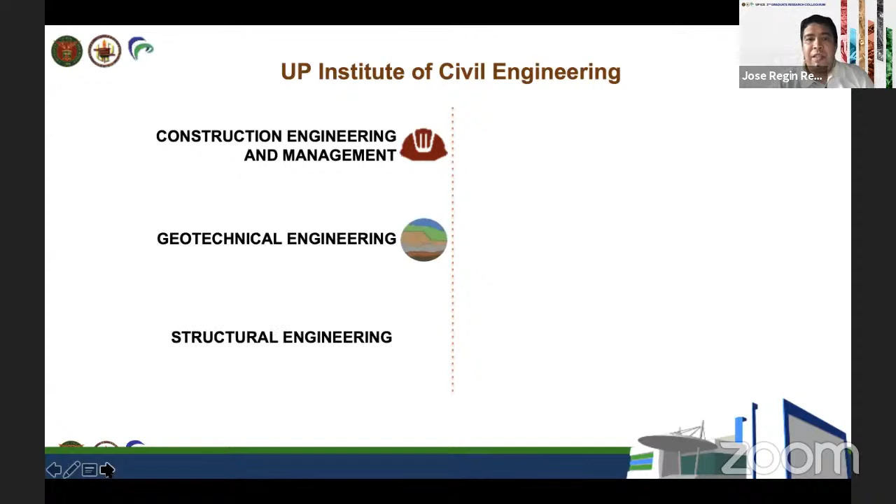Aside from these, allow us to also mention that the Institute has a research agenda, according to the 6 groups. In UP Institute of Civil Engineering, we have 6 groups: the Construction Engineering and Management Group, the Water Resources and Coastal Engineering Group, the Geotechnical Engineering Group, the Structural Engineering Group, the Environmental and Energy Engineering Group, and the Transportation Engineering Group.

And each of these groups would have their own research agenda, so I won't go into that anymore this afternoon.

But I wanted to share some of the recent and ongoing research projects of the institute, the details of which may be found also on our Facebook page, our social media account. As you can see from the following slides, there are also the contact information of the project leads, so you're very welcome to connect with them if you're interested in their topics.

And perhaps if you want to also pick their minds regarding the prospective topics na siguro gusto niyong i-develop, you may also contact them. So just a run through of some of the projects being undertaken at the university.

We have here the e-TRAMS project, enhancement of transportation management software. The project lead is Dr. Sean Palmiano, who is also head of our transportation engineering group. This is part of their Intelligent Transport Systems Laboratory, which is hosted by the National Center for Transportation Studies.

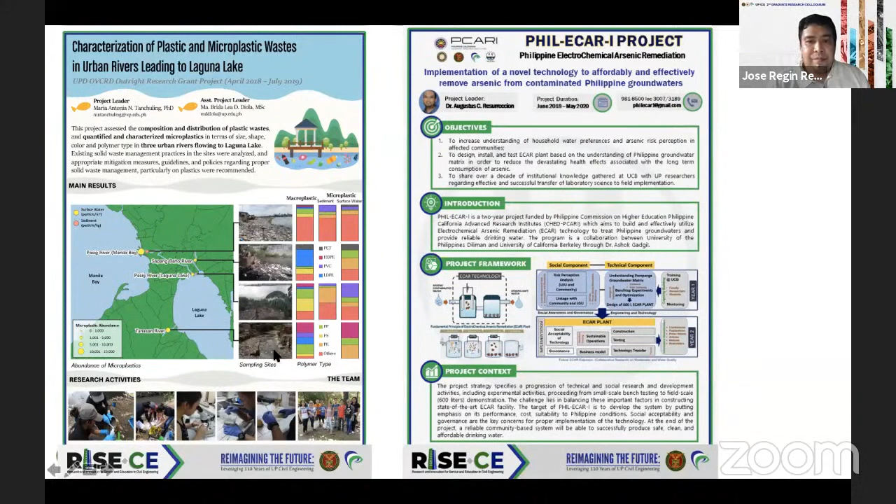And then we have the IWASTO project, integrated waste analysis, survey and technological options. I hope I pronounced that right. This is also funded by the DOST. The project lead is our director, Dr. Tonette Tanchuling. Then you have Project SMART, the ecosystem modeling and material transport analysis for the rehabilitation of Manila Bay, led by our research coordinator, Dr. Eugene Herrera.

We also have a project on the determination of appropriate expansion of perlite to conform to standards of lightweight aggregates for use in construction. This is led by Assistant Professor Belle Caram.

So these are among, I think, the newer ongoing projects: the prototype automated visual survey equipment, or PAVE project, which is led by Dr. Leia Brunuela Ambrosio. This is about pavement engineering.

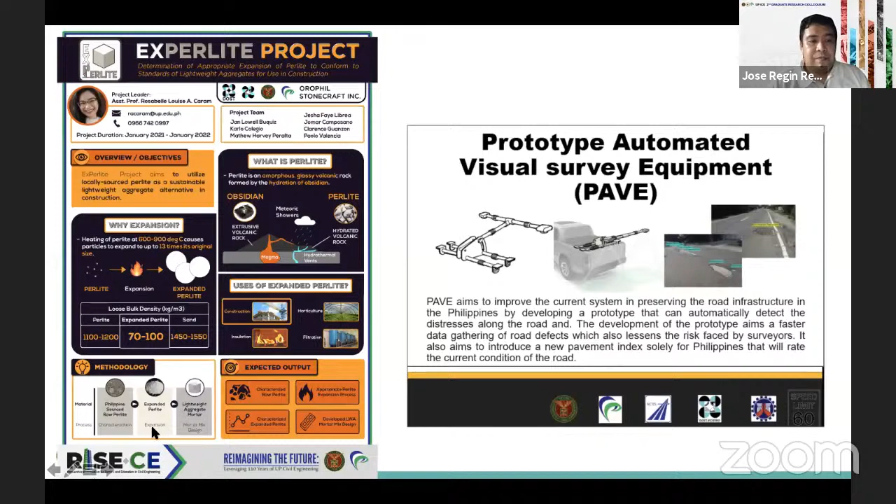So these are just some of the projects ongoing — just to mention a few that are also funded by various institutions, especially the DOST, mainly through PCIEERD. The institute has also been blessed with a number of projects supported by international institutions as well as private funding.

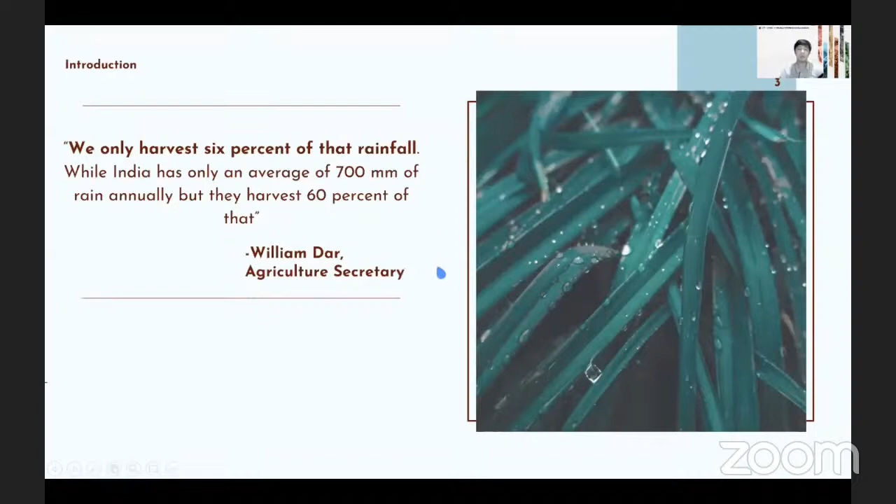For the methodology of this study, we use multi-criteria decision analysis, a decision tool that integrates different criteria and evaluates different alternatives to decide which option is most preferred. This is useful when compiling assessments of different stakeholder preferences.

Our study area is Teresa Rizal. It is located about 32 kilometers east of Metro Manila and has a population of close to 60,000. It's composed of about 9 barangays, and of those, 3 barangays experience weekly to daily water interruption.

It would be good to use this as a scenario for comparing preferences of those with less water interruption versus those with more frequent interruption. For the framework of the multi-criteria decision analysis, we've used 4 factors: reliability, total cost, adoptability, and benefits. These 4 factors have different weights that may change depending on the scenario considered, but a general scenario will also be provided.

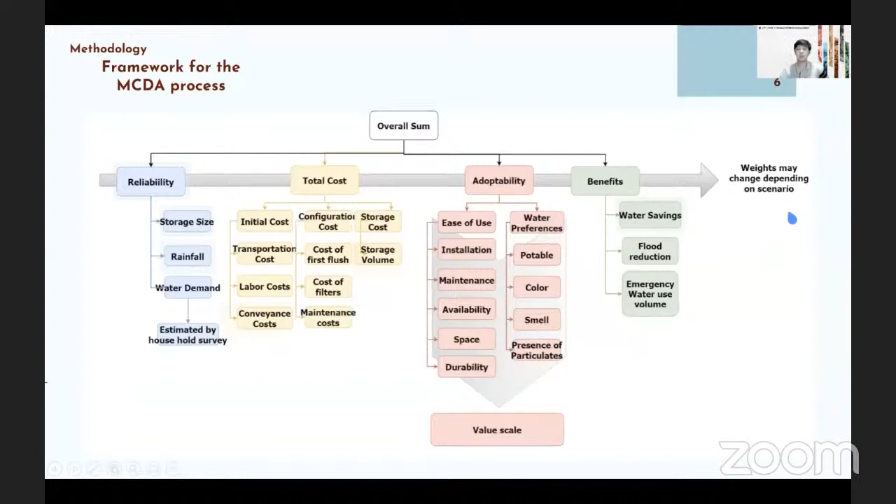For the survey conducted, a preliminary survey was first done. This was a closed group of at least 20 people, and we tried to create the first relevant criteria. At this stage, we wanted to remove any research bias we might have introduced, so we wanted to confirm those through the preliminary survey.

Then the main survey, along with an IEC, or information, education and communication, was done. This was to inform respondents of other preferences and alternatives for rainwater harvesting, and the basic knowledge of rainwater harvesting. We surveyed 329 people online and had them rate the importance of factors on a 4-point scale.

The output for this was a water demand estimate. We also used that survey to estimate water demand and their preferences and weights. For problem parameters, we obtained the averages for roof area, household size, and water demand from the survey. We also had runoff coefficient from references, and rainfall data from local rainfall stations that measure average and daily rainfall.

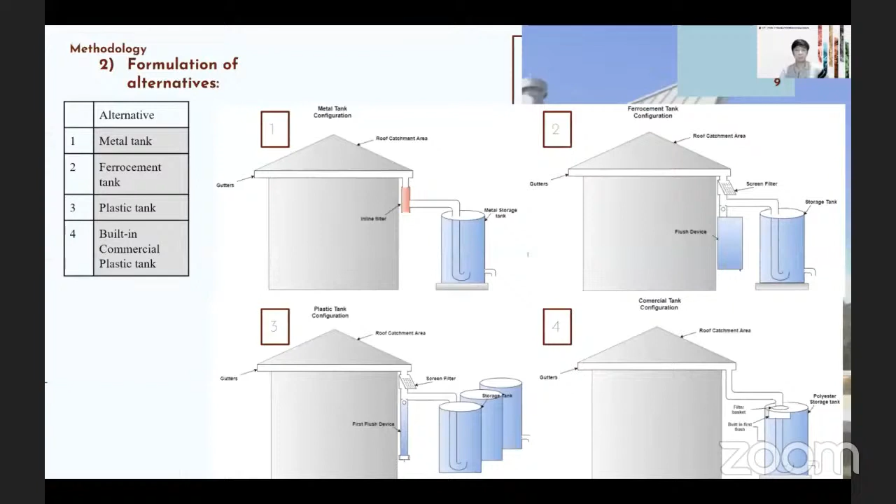So the main survey concerns, and these were the results: about 2/3 experience either not enough water supply or frequent water interruptions. The main problems with rainwater harvesting, or RWH, are the source, as it's a possible source of mosquitoes, and that people consider roof water to be dirty. I believe these two factors are strong factors that are probably hindering people from adopting such systems.

They also want to use the harvested water mainly for toilet flushing, watering plants, and cleaning. Note that all three of these are non-potable uses, and will be reflected in the water demand that the rainwater harvesting systems will supply.

About 81% of them want to harvest rainwater, so there's actually a large percentage that want to do so. And 76% would still collect rainwater even though it might only be available during the rainy season.

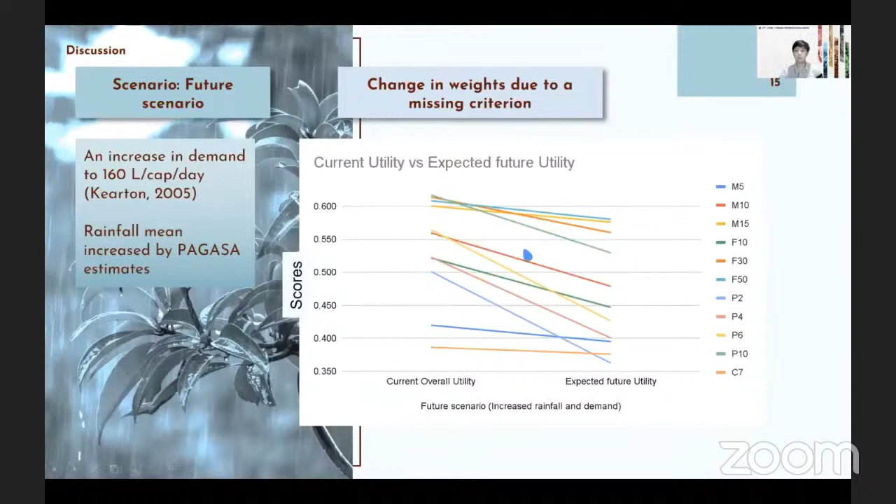In conclusion, about 2/3 of the respondents experience problems from their current water supply. 76% are willing to harvest rainwater even though it's only available during the rainy season, and their main concerns are mainly about the presence of mosquitoes and dirty rainwater.

P10 is the most preferred alternative since it has a balance of cost and reliability, with F30 and F50 coming next. When we consider high-income residents, their preferences shifted towards the F50 alternative, and so did the future scenario, shifting towards F50, as this is able to provide the reliability and durability for these scenarios.

So that's it. Thank you everyone for listening.

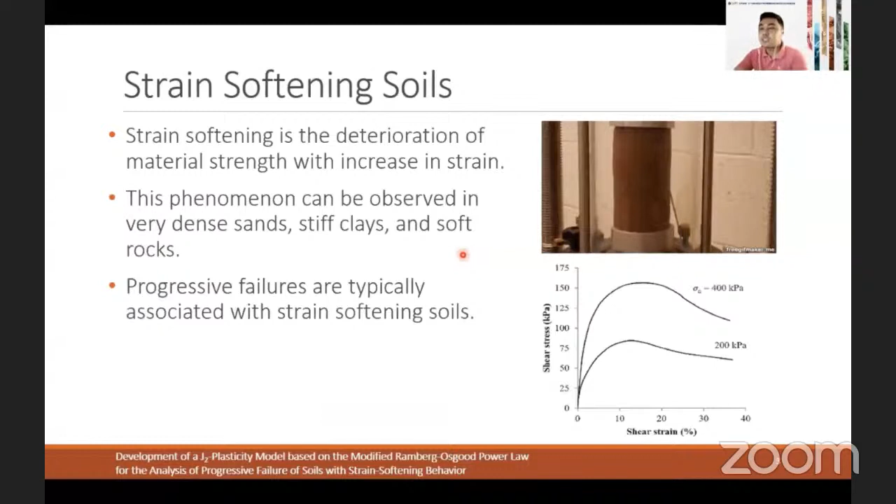In geotechnical materials, this phenomenon can be observed in very dense sands, stiff clays, and soft rocks. Progressive failures, as we described earlier, are typically associated with strain softening soils. So how do we analyze these progressive failures?

In this study, we aim to develop a plasticity model which utilizes the stress-strain behavior of a soil sample in the finite element analysis of progressive failures. We do that by getting the strength test results from the laboratory and then use the modified Ramberg-Osgood power law to create a mathematical expression for these strength test results. And then we incorporate this mathematical expression into the J2 plasticity model, which allows us to determine the stress during the plastic deformation. We then incorporate this in the finite element analysis, in which we include the problem geometry and loading, which gives us the geotechnical analysis of these progressive failures.

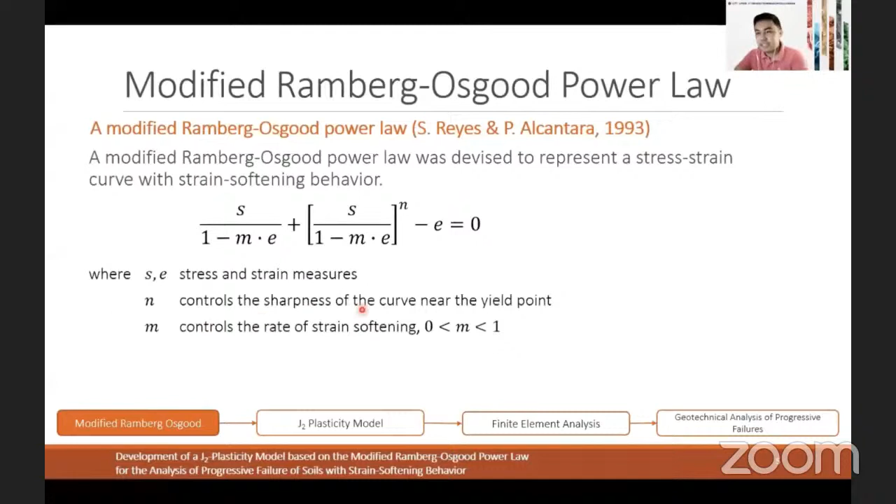So let's start with the modified Ramberg-Osgood power law. This was developed by Reyes and Alcantara in 1993, devised to represent a stress-strain curve of soils with strain softening behavior, represented by this mathematical equation. In here we have four parameters: S and E are stress and strain measures, and then N and M. This equation represents the backbone curve of the normalized stresses and strains, in which if we nominate values for N, M, and E, and solve for S, we can get a curve that looks like this.

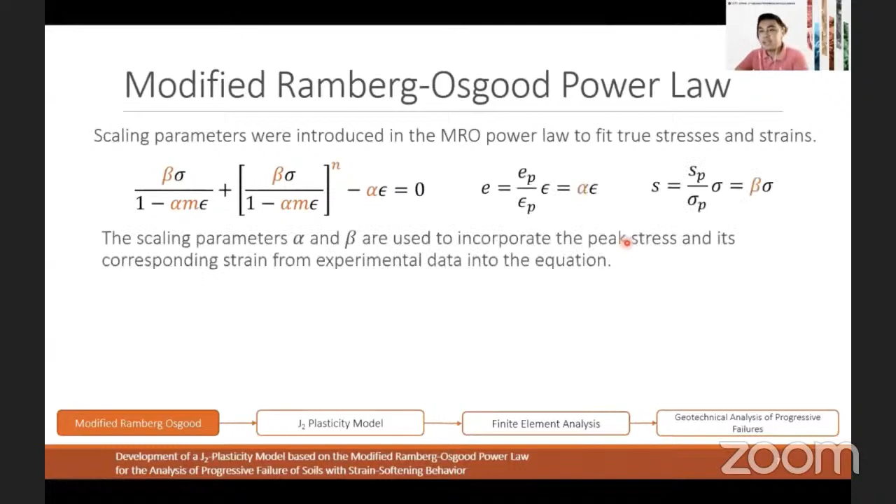So to use the modified Ramberg-Osgood power law for this study, we devised two parameters, alpha and beta, in which we relate the normalized stress measures to the experimental measures of stresses and strains as determined in experimental tests. So the MRO will need four parameters for the curve to be properly defined: M, N, alpha, and beta. And then the next problem is how we get this M, N, alpha, and beta.

So we use the method of least squares to determine these parameters given a set of experimental strength results. In a typical method of least squares, we minimize an objective function, which is the sum of the square of the difference between the observed stresses and the fitted stresses. As you can see here, the fitted stresses will be solved by the modified Ramberg-Osgood power law, and it is solved implicitly, so we solve it iteratively, typically by Newton's method.

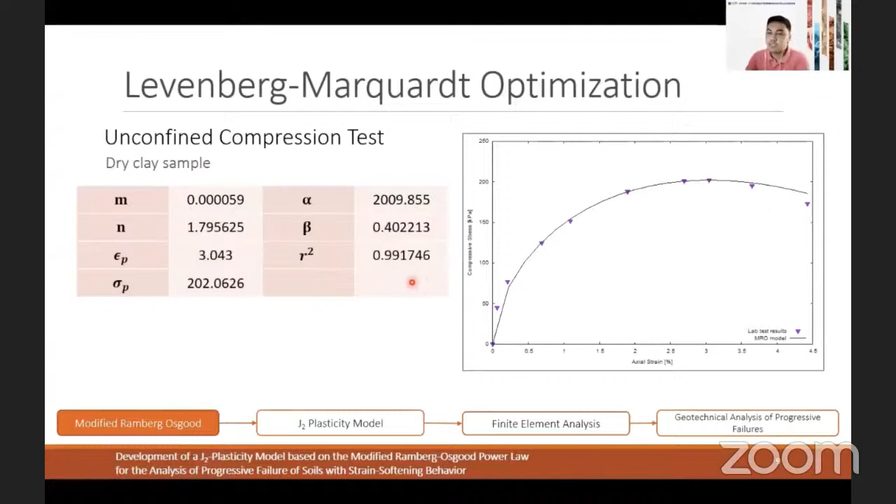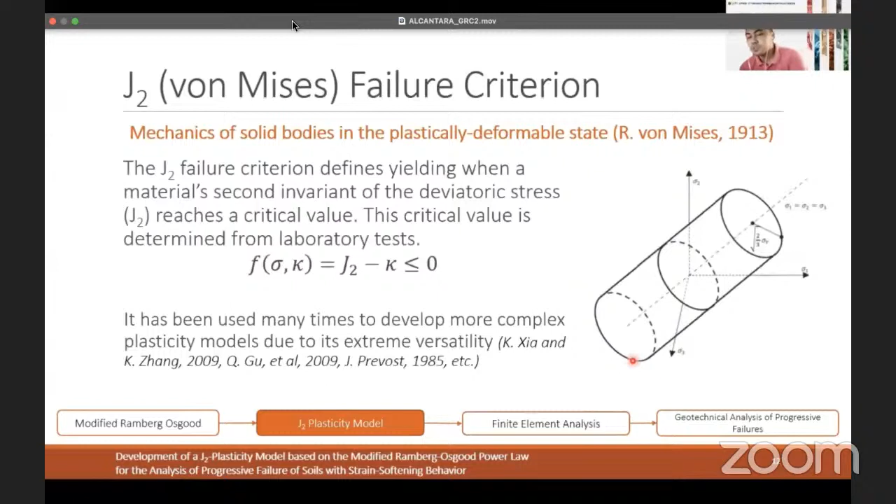And then we move to the plasticity model. For this study, we use the J2 failure criterion, or the commonly known von Mises failure criterion, in which it defines yielding when a material's second invariant of the deviatoric stress reaches a critical value. Mathematically, it looks like this. Geometrically, if a stress state is outside the cylinder, it means that the material has already yielded. We chose this failure criterion because of its extreme versatility, since it was used by many authors in developing more complex plasticity models.

So we implement a stress integration algorithm in which we have this failure surface, and then we have an initial stress state.

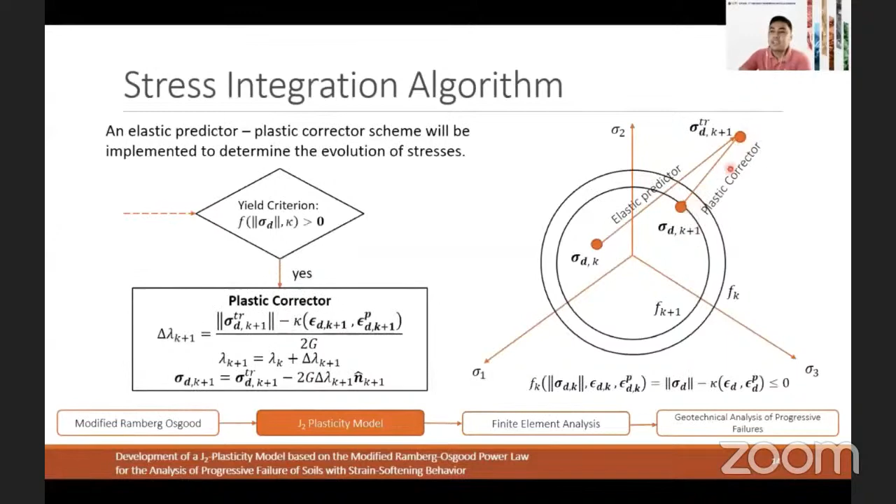And then if we apply displacement, there is a change in stress. If it is inside the yield surface, it means that it does not yield yet, so this is the final stress state. However, if the elastic predictor gives us a yielding stress point, since the material is strain softening, the strength should deteriorate. Therefore, it will move back into a lower stress state, and this will be the final yield surface.

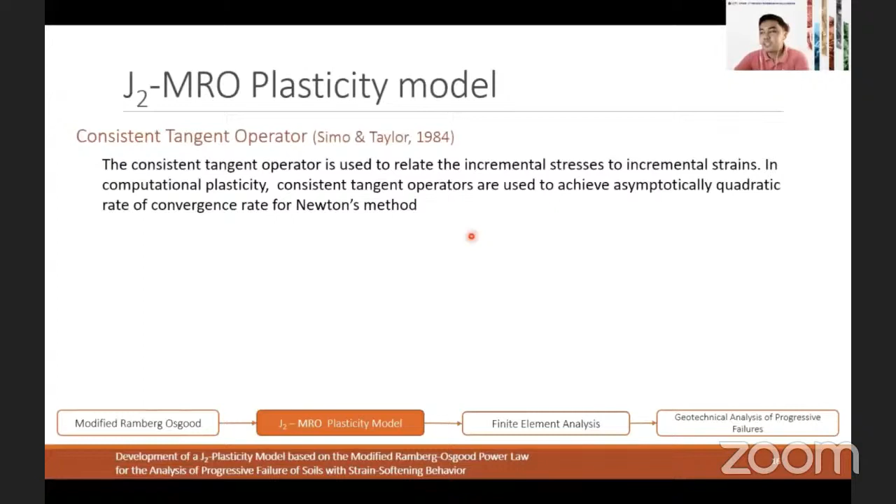Initially, we implemented the model using one element, a 9-node quadrilateral, in a C program. We have two types of loadings, stress loading and strain loading, but for this presentation we will only include the strain loading. We imposed prescribed displacements at the boundaries of the quadrilateral, and since it is strain loading, we can observe the post-peak response of the element, so hence we can see the strain softening, which we can't do in stress loading.

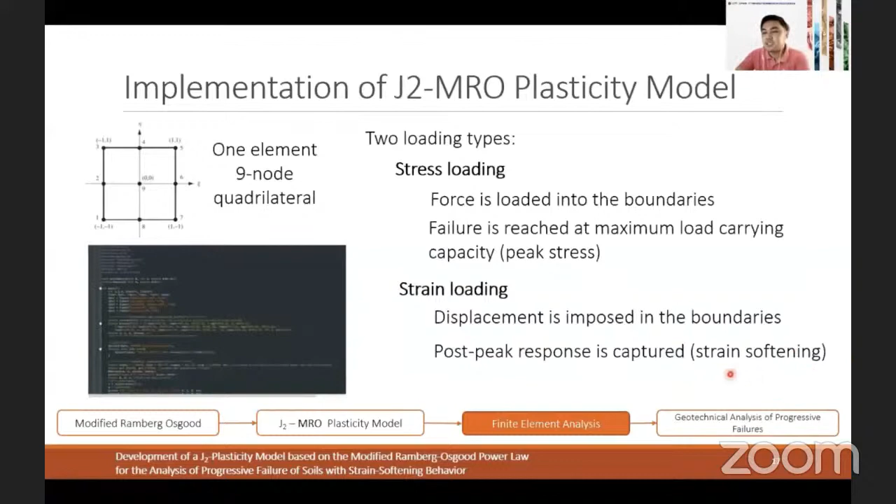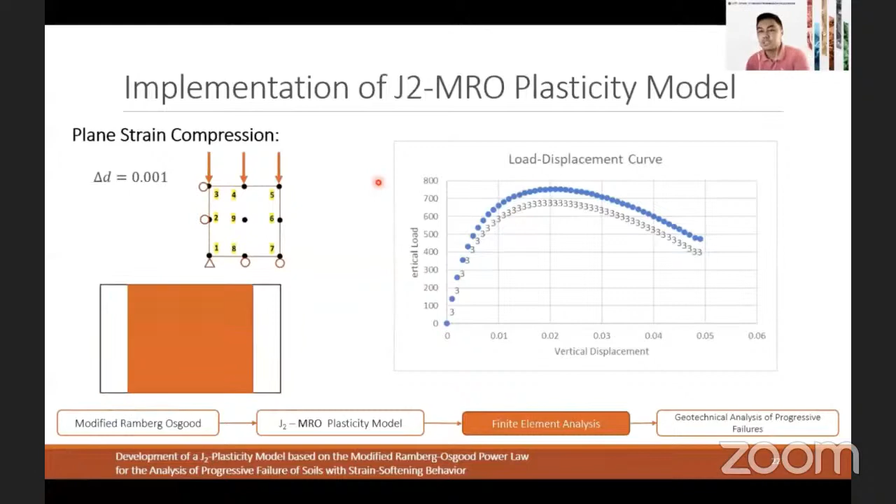We also did that for plane strain compression instead of axisymmetric. For this case, the stress results from the J2 MRO implementation also agrees with the experimental data, and this is the load displacement curve. The strain softening is also captured, and the rate of convergence is also fast enough. It is quadratic rate of convergence, and it only needed 3 iterations for each increment of displacement. These are the stresses and strains experienced by the Gauss points.

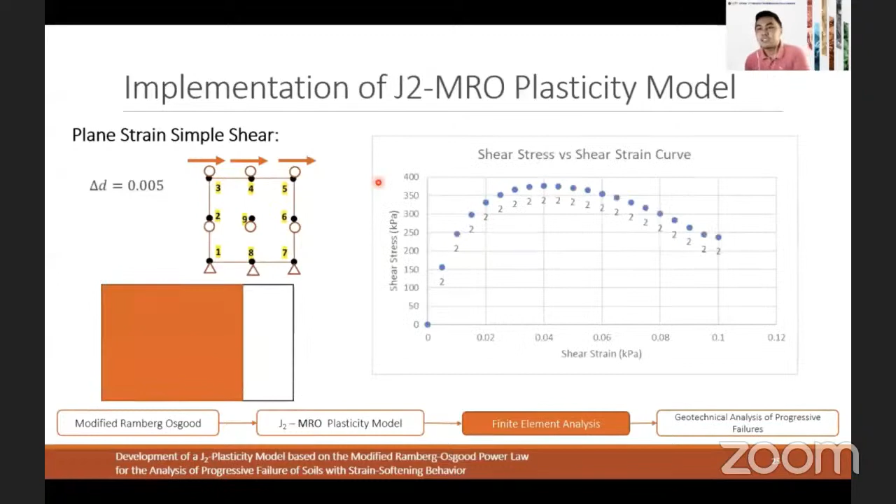Finally, we did the same thing for plane strain simple shear. Again, there's an agreement in the stress strains for the experimental and the J2 MRO results. This is the shear stress versus shear strain curve, and these are the stresses experienced by the element. The shear stress for all the Gauss points are equal, and these are the residual values for the stresses.

After this, we are doing the geotechnical application. We are looking at the deformation of soil under surface strip and circular footings. For strain loading, the expected output is a contour map of the stress distribution as we load the footing, along with the plastic straining and the deformations.

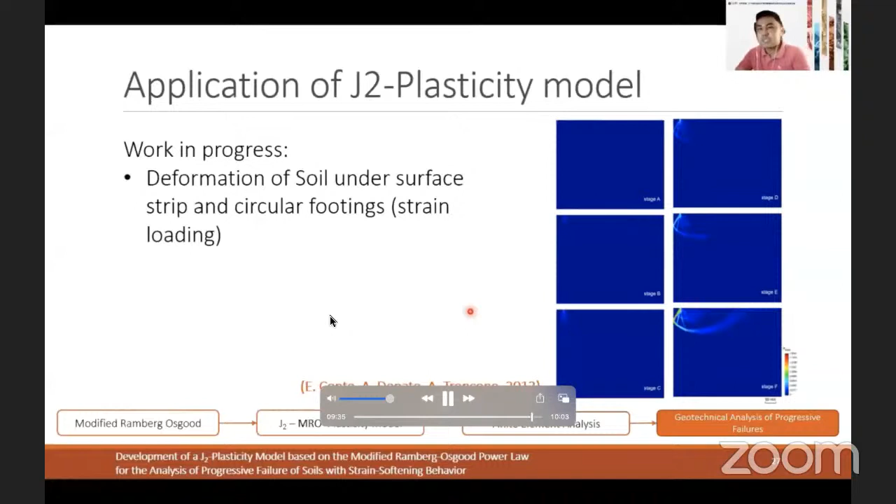Initial conclusions: the use of the Levenberg algorithm in determining the parameters of the MRO power law was proven adequate and repeatable. The developed J2 MRO plasticity model was able to satisfy consistency for both axisymmetric and plane strain conditions. With the use of the consistent tangent operator, a quadratic rate of convergence was observed, and the number of iterations to convergence was minimized. That's all, thank you very much.

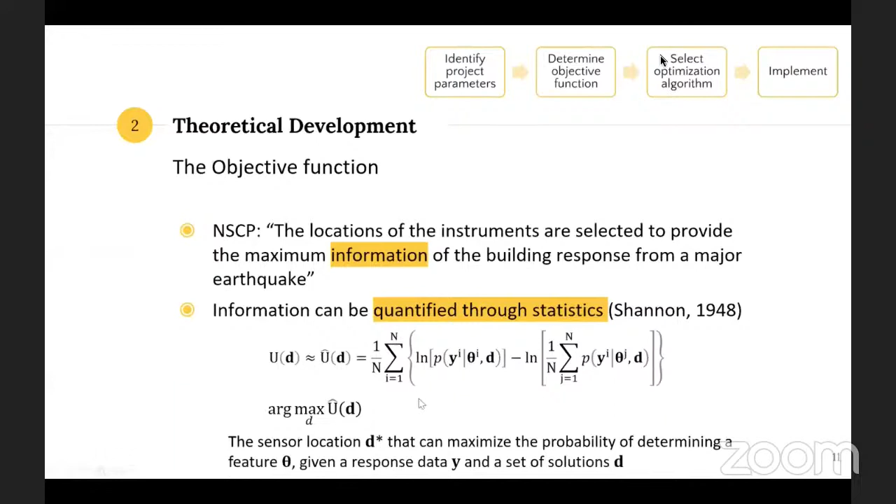So what is the objective function that we're going to use? Without going too much into detail, this is the objective function—maximizing this function here. What does this say? It basically says that we need a sensor location D star from this optimization problem that can maximize the probability of determining a certain feature theta, given response data Y and a set of solutions D. Essentially, the output of this maximization problem is the optimal D that will maximize the amount of information in a given response data, considering a certain feature theta. That's the objective function.

Now, how do you select the optimization algorithm? The scope of the algorithms for this study was the covariance matrix adaptation evolution strategy, so all the algorithms in the selection are CMAES. What is CMAES? It's a derivative-free randomized global optimization algorithm that relies on the continuous multivariate normal distribution. It's useful for problems with large population sizes that can be prone to local convergence, as in the case of optimal sensor placement.

Apart from the continuous version of CMAES, we're also going to include in the algorithm space a discrete version of CMAES, using the multivariate binomial distribution. So essentially, we're choosing between a discrete implementation of a continuous CMAES variant and the discrete reformulation of CMAES. That's the selection we're going to use.

So in implementing this, first we implemented it on a steel column, 100 by 100 by 600, fixed supported on the base, with two cases.

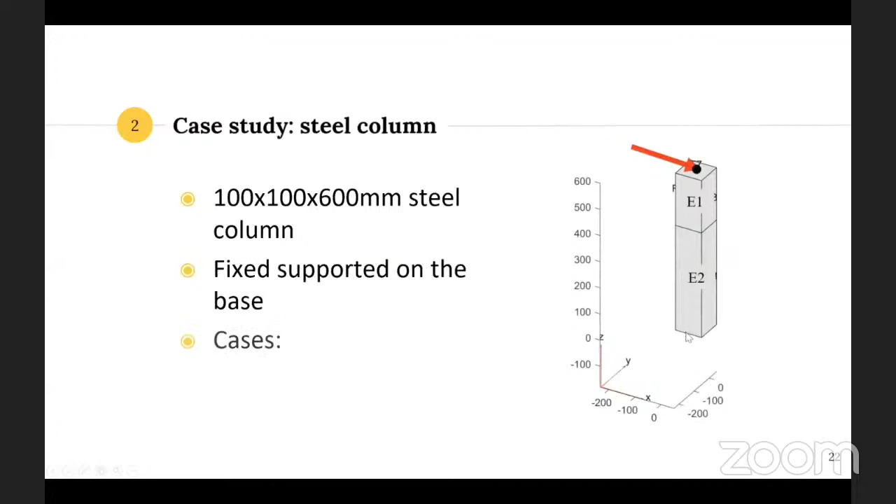Implementing this framework, the project parameters are: number one, we're going to use one sensor and consider two cases. The objective function is the same as you saw earlier, and for the selection algorithm, we're going to compare rank mu CMAES and discrete CMAES.

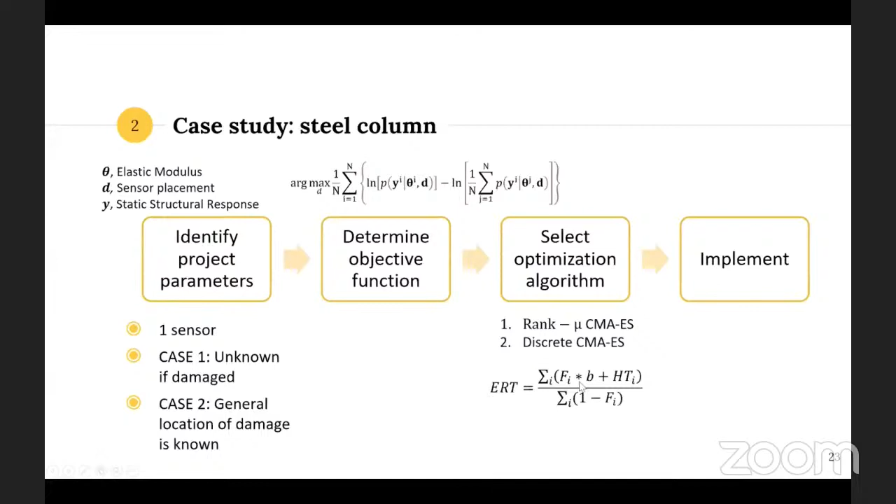How do we compare the two? We employ a parameter called the ERT, which depends on the budget of your calculation and a certain hitting time.

Applying that to this problem, considering case one, assigning probability distributions of the elastic modulus for region 1 and region 2, we identified that the optimal sensor placement is at the top of the steel column. Placing the single sensor there will grant you the maximum information.

How about case two? We know that the general location is at E2, and hence E1 is undamaged, so we can already set the elastic modulus at E1 to 200 GPa. At E2, since we know it's damaged but don't know how much, we assign a probability distribution there. After running the algorithm, we determine that the OSP is at 500 — it shifted downward to the location of the desired information.

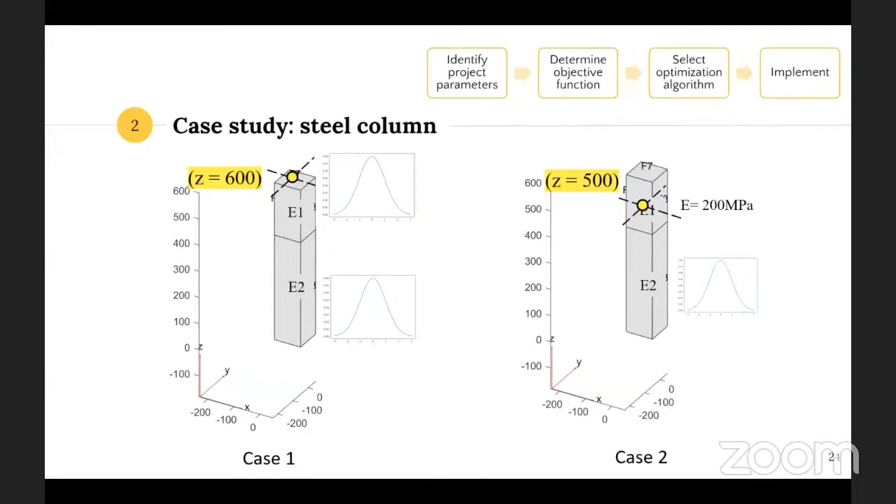Since the ERT is greater for discrete CMAES than for rank mu CMAES, that means rank mu outperforms discrete CMAES — rank mu is better for this problem.

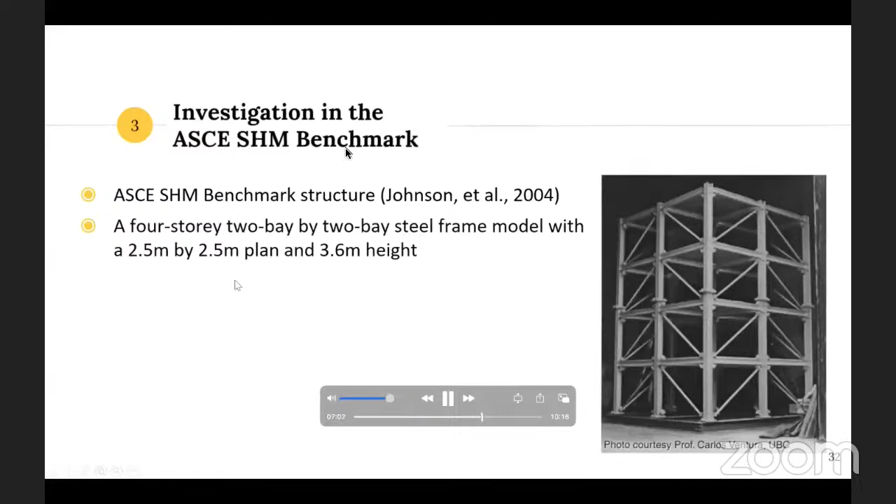Now, how do you implement it on an actual building? For an actual building, we're considering the ASCE SHM benchmark structure, a 2.5 by 2.5 by 3.6, 2 bay by 2 bay steel frame, which has a published sensor placement.

What we did was compare the modal properties obtained from the sensor positioning published in their paper with the actual OSP output by the algorithm, considering two cases once again: undamaged and damaged. The damage is located at the first floor bracing.

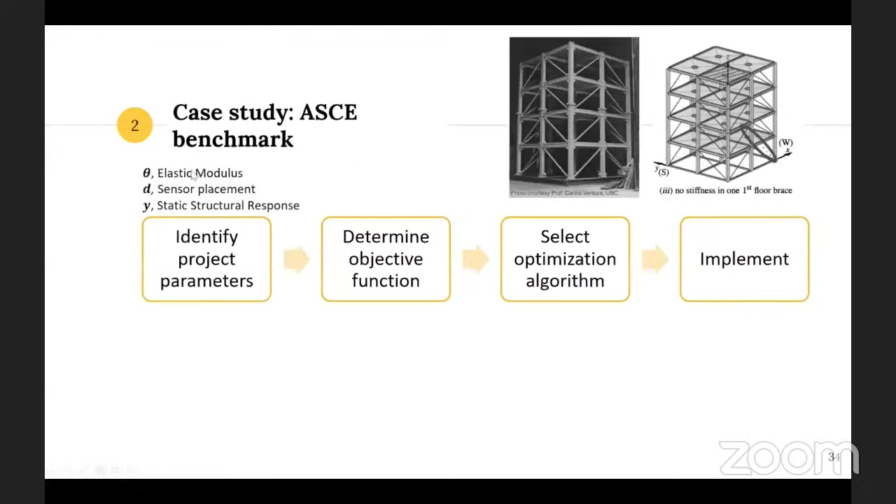Using the same framework, the project parameters are the same set we showed earlier, considering the two cases, and the objective function is still the same objective function.

Before proceeding to the implementation, we select which algorithm to use. Using ERT and the information from the case study before, we determine that rank mu CMAES outperforms discrete CMAES by 1.6 times, so we know we're going to use rank mu CMAES in implementing this framework.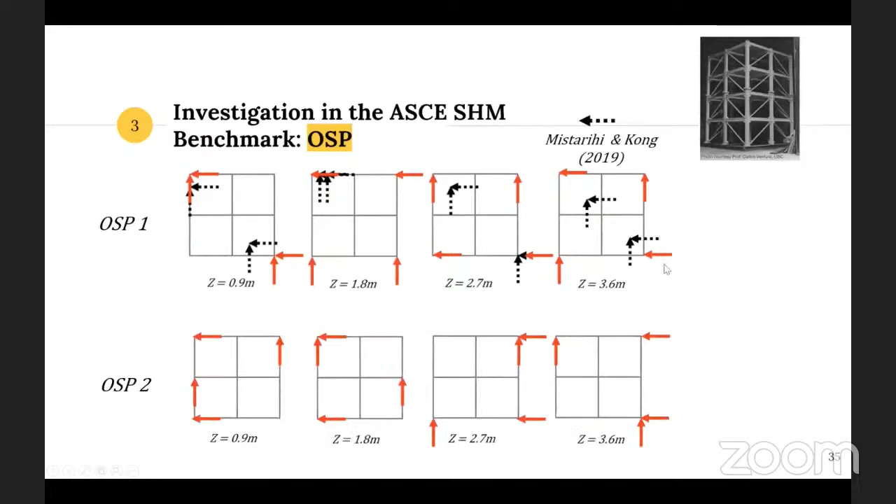This is another set of OSP. Comparing the two, there's only a 0.53 difference in information, so you can use OSP1 or OSP2.

Using OSP1 to compare with the actual ASCE sensor placement, we compute the modal properties using this sensor placement and using the ASCE sensor placement, and compare the two. These are the results of that comparison using a theoretical finite element model.

These are the MAC values — the higher the MAC value, the closer it is to 1, meaning the closer the two vectors of modal values are. You can see for mode 1 and mode 2, they're all close to 1. So what does this say?

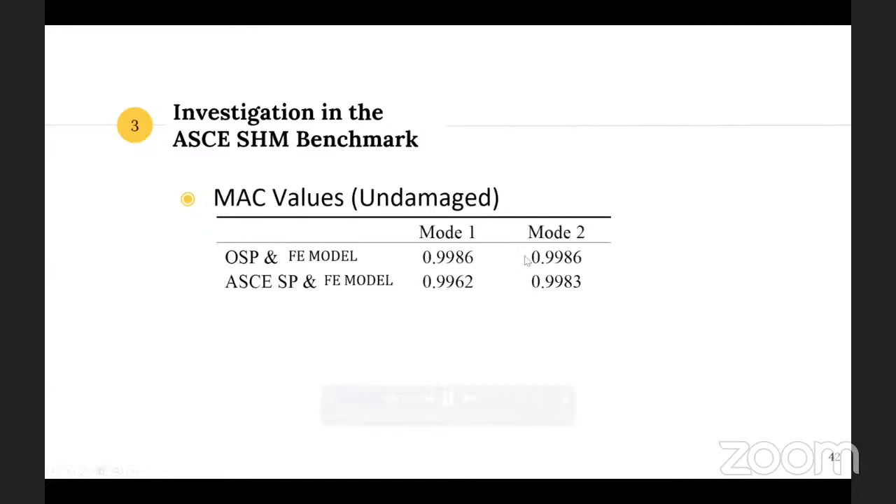So for an undamaged structure, sensor placement that is well distributed according to the geometrical location of the columns and stiffeners gives the same quality of MAC values.

So what about the damaged case? For the damaged case, when we run the algorithm, the sensors are located in the general region of the damage. Again, doing the same thing, we can see that there's a reduction of MAC for the ASCE SP. So using ASCE SP actually resulted in a deviation from the theoretical OMA. So that's in terms of the MAC.

So for a damaged structure, the sensor placement should be near the location of the damage. So it's important that this should be identified in an SHM plan.

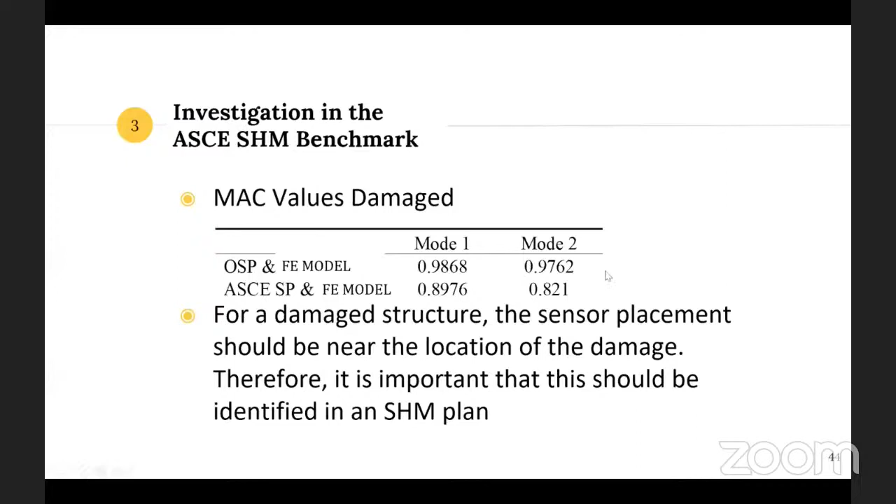To conclude, the OSP framework was improved by adding an offline algorithm selection methodology. For an undamaged structure, the OSP is a configuration wherein sensors are well distributed to the columns and the stiffeners. And for damaged structures, sensors should be placed near the region of the damage, and failure to do so compromises the quality of the OMA.

So that's it. Thank you for listening.

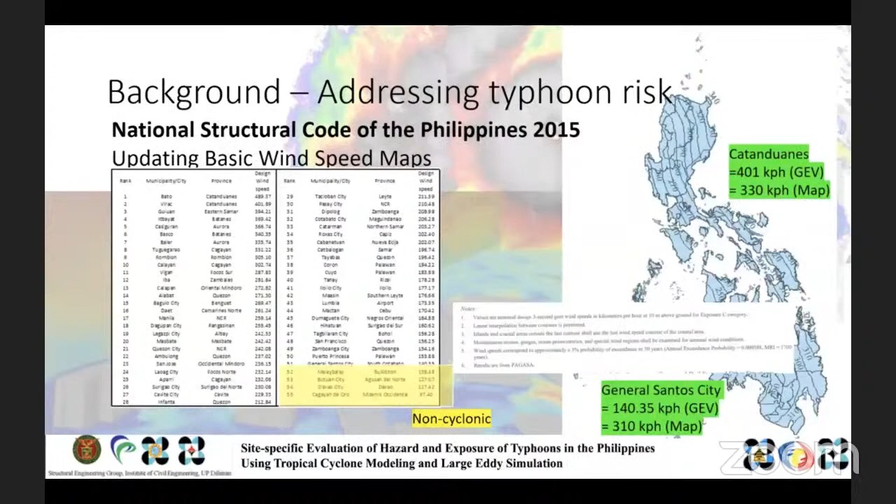However, upon close review of the basic wind speed maps of the NSCP 2015, it reveals inconsistencies between the extreme values and the contour maps. Comments also include failure to distinguish cyclonic from non-cyclonic winds.

PAGASA, in its severe wind program, aims to address the shortcomings presented earlier with its TCRM model, which generates and replicates tropical cyclone events to determine the cyclonic winds while retaining the GEV analysis for the non-cyclonic winds.

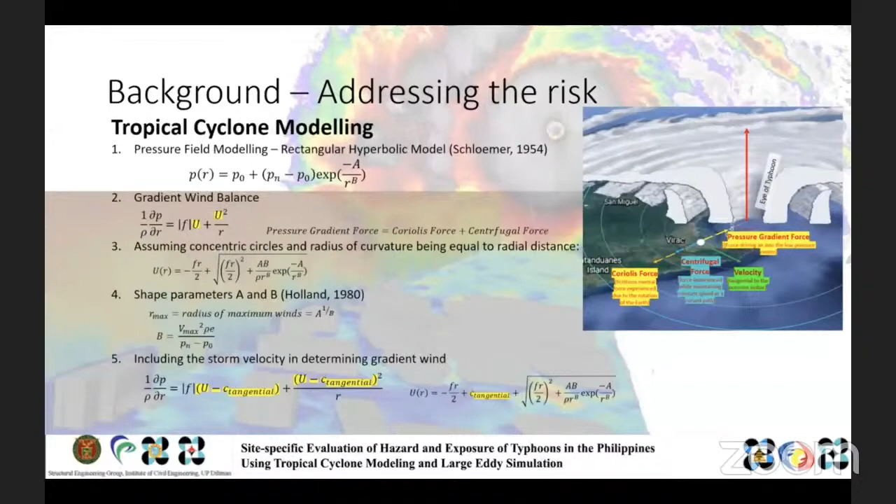The simulation of the typhoons included determining the main governing forces of the tropical cyclone, determining the storm's pressure profile, inclusion of the effects of the translation velocity, and conversion of the regional winds to the surface winds using exposure parameters such as gust factors and roughness lengths.

However, these parameters for exposure were developed from stationary and steady wind flow analysis. For complex terrains and urban settings, these parameters may no longer apply.

A hybrid model was previously developed by Huang and Zhu in 2014, including a CFD analysis to take into account the complex terrain effects, yielding closer results to the actual surface winds.

What complicates every CFD analysis, however, is modeling turbulence. There are two turbulence models at hand: the Reynolds Average Navier-Stokes equation, or RANS, which treats turbulent effects as additional shear stresses, and the large eddy simulation, which treats turbulent flow as the superimposition of eddies.

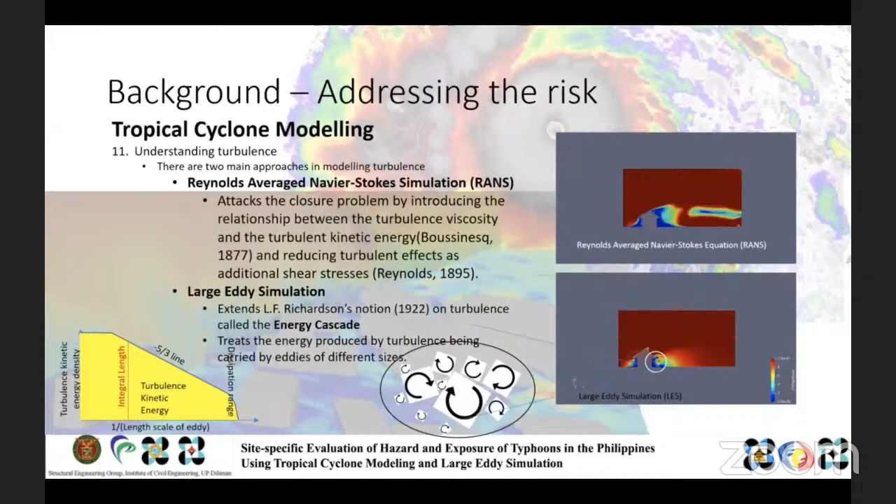The large eddy simulation originated from the energy cascade concept proposed by Richardson in 1922. Higher turbulent kinetic energy would mean a wider range of eddies, which also means higher peak gusts.

The previous hybrid model, since intended for aerodynamic purposes, runs on modeling turbulence which would only account for the average effects, focusing more on wind pressures. The study proposes to use large eddy simulation instead.

The study aims to determine the site-specific parameters for wind hazard, or the typhoon wind, and exposure, or the influence of the terrain. Wind hazard pertains to the magnitude of the typhoon sustained wind, while wind exposure pertains to gust factors, wind directionality factors, and wind profiles.

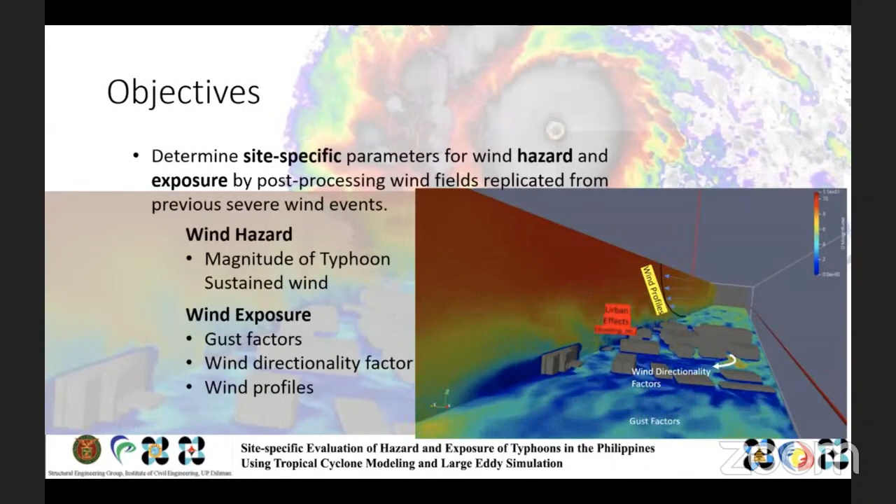The gust factors are the conversion factors used to determine the 3-second gust from the sustained wind given a degree of wind exposure. Wind directionality factor, in contrast to the NSCP definitions, determines in which direction the location was most exposed to severe winds.

And the roughness length determines the vertical mean profile near the ground. The methodology relies on the weather stations and the typhoon track to determine the pressure field of the typhoon. Using the pressure field, the typhoon wind field is then modeled, which is then used as an input to the CFD analysis involving a complex terrain.

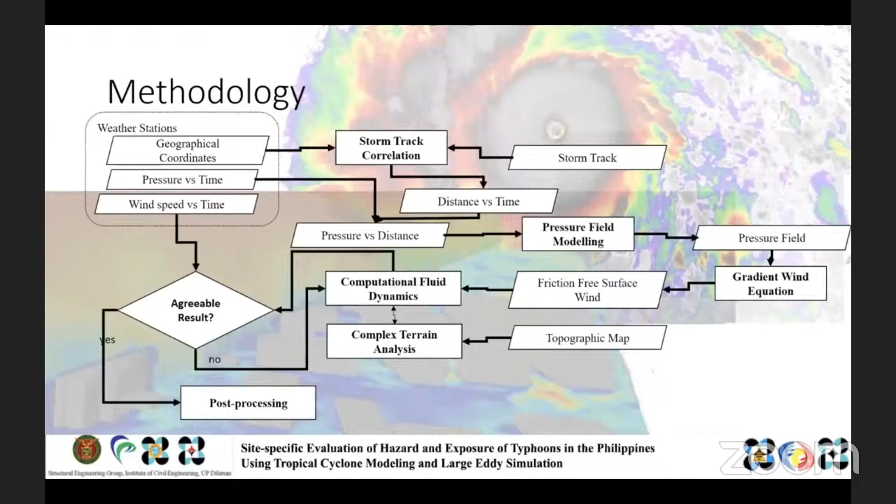Once the simulated winds were validated with respect to the actual data, the site-specific parameters for exposure can now be post-processed. The study includes modeling of the pressure field from the weather stations, which observed the passage of the typhoon.

The time history pressure data were then related to the proximity of the storm over time in order to determine the pressure versus distance graph. The pressure points were then fitted into a rectangular hyperbolic profile.

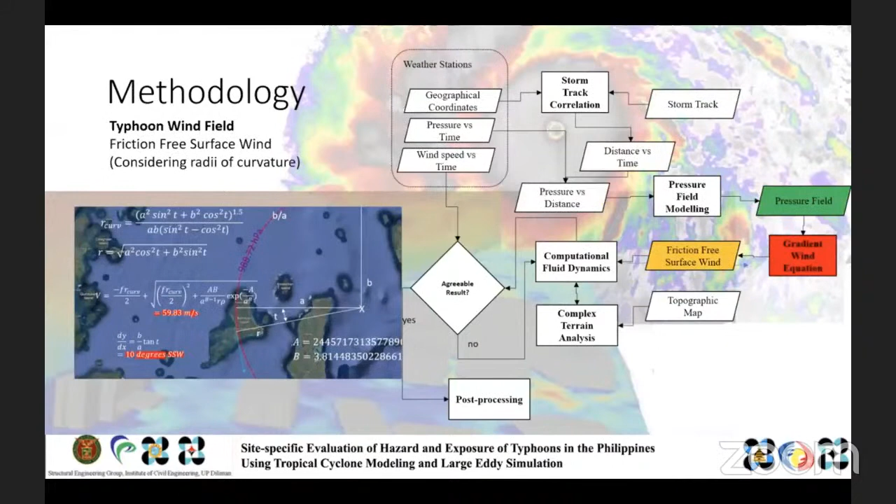However, the main difference is that the pressure isobars will be ellipses instead of circles. Thus, the radii of curvature will be determined also. Using the radii of curvature, the pressure gradient, the Coriolis force, and the centrifugal force, the typhoon wind field will be determined, which will be the input of the CFD analysis. For the CFD analysis, as intended, LES will be used.

The complex terrain is generated using the elevation data from OpenStreetMap. To reduce the computational load, the buildings are reduced to rectangular blocks but still carrying the key dimensions such as length, width, and height. Also, the computational model is scaled 1:10. As a result, the velocities are also scaled 1:10. Then the simulated winds will be compared to the recorded winds for the validation of the procedure.

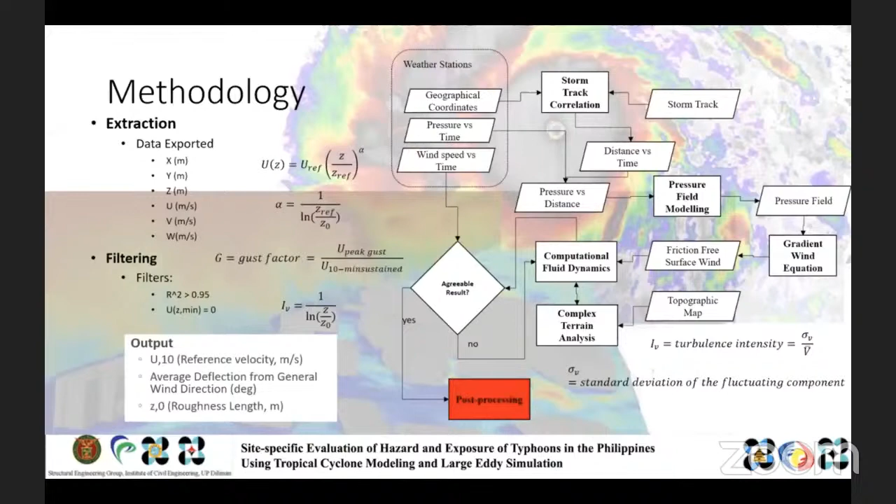Post-processing includes fitting the boundary layer profile to determine the roughness length, the comparison of the friction-free surface wind to the local wind to determine the peak gust, evaluation of the directional deviations of the local winds, and the determination of the turbulence intensities. The simulation study explored two scenarios: one in Typhoon Haiyan in Bantayan, Cebu at 8:30 a.m., and another by Typhoon Nina or Nock-ten in Bicol in 2016, passing over Catanduanes.

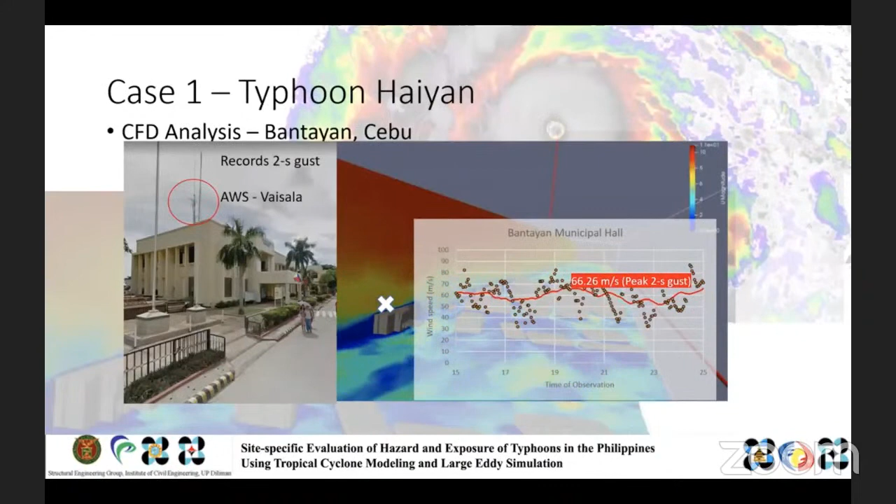These are the comparisons of the recorded peak gust from the simulated peak gust. The winds simulated were originally instantaneous. Then, getting the 2-second averages for Typhoon Haiyan's case yields a 2-second gust of 66.26 meters per second, with a difference of 2.16 meters per second from the actual data. Being close enough, the other points of the computational domain were then post-processed.

Evaluating the roughness lengths, it reveals a relationship with the building density. The higher the building density, the higher the roughness lengths. The maximum gust factors are also related to the orientation of the alleyways. The more the alleyway is in the same direction as the general wind direction, the higher the peak gust.

Plotting the directional deviation with respect to the gust factors reflected the fact that as local winds became aligned to the direction of the general wind, they were more likely to build up momentum, resulting in higher wind speeds. In cases such as Osmeña Street, plotted here, where most of the mid-rise buildings are situated in Bantayan, Cebu, this caused the loss of the logarithmic profile, and it also caused downdrafts which damaged the already deteriorating Escario House at the end of Osmeña Street.

For the case of Typhoon Nina in Virac, the wind flow across a kilometer-long domain was initialized after 25 seconds. With the flow imbalance resolved after the initialization, the flow began to exhibit its fluctuating characteristic. The simulated peak gust was determined to be 57.83 meters per second, compared to the actual 54 meters per second.

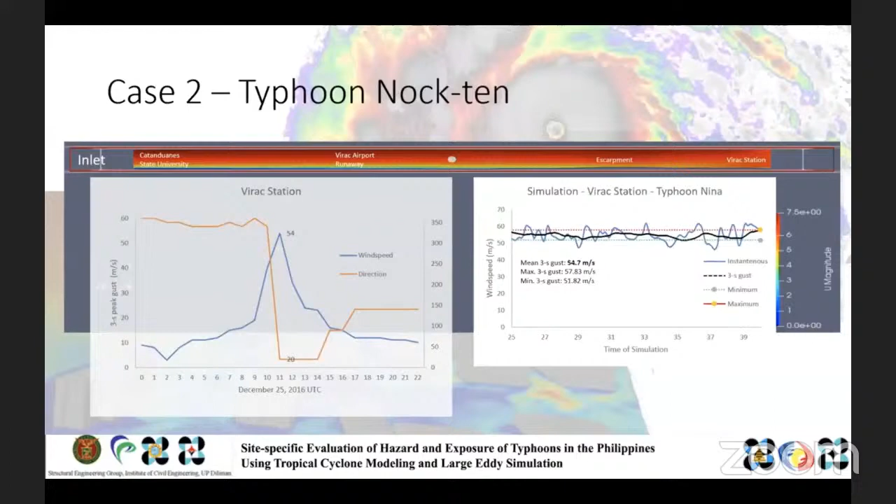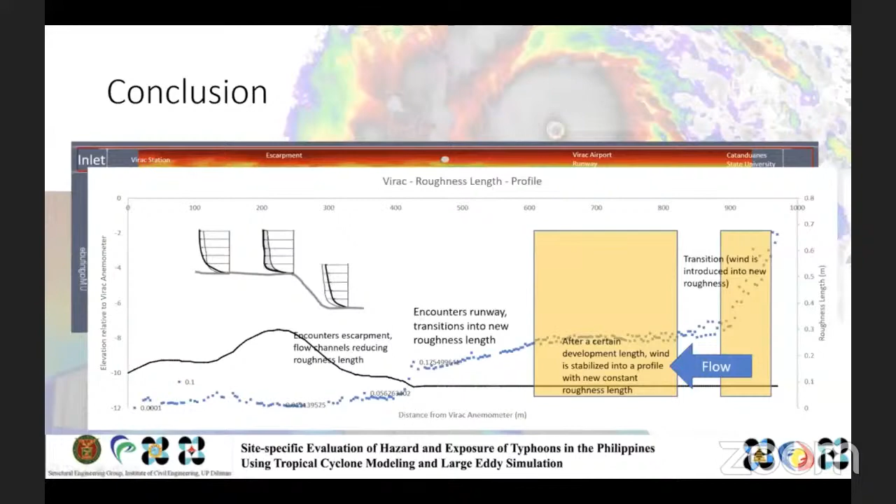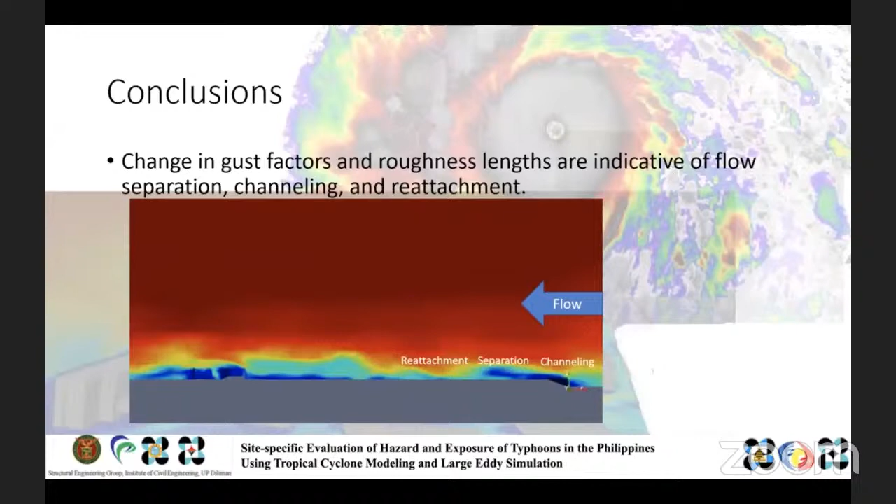Also, the increase of gustiness shows a positive relationship with the increase of elevation in the general wind direction. The change of gust factors and roughness length are indicative of flow separation, channeling, and reattachment, as illustrated here. This is the flow channeling, where you observe an increase in the gust factors but a decrease in the roughness length. What follows is the separation, where we observe an increase in roughness length but a decrease in gust factor. Then we have reattachment, where there's an increase in gust factor and a decrease in roughness length.

The provisions and formulas for the turbulence intensity, on the other hand, only apply for isolated conditions when comparing the prescribed turbulence intensity, computed using this formula based on the code, and the simulated turbulence intensity determined by the simulation.

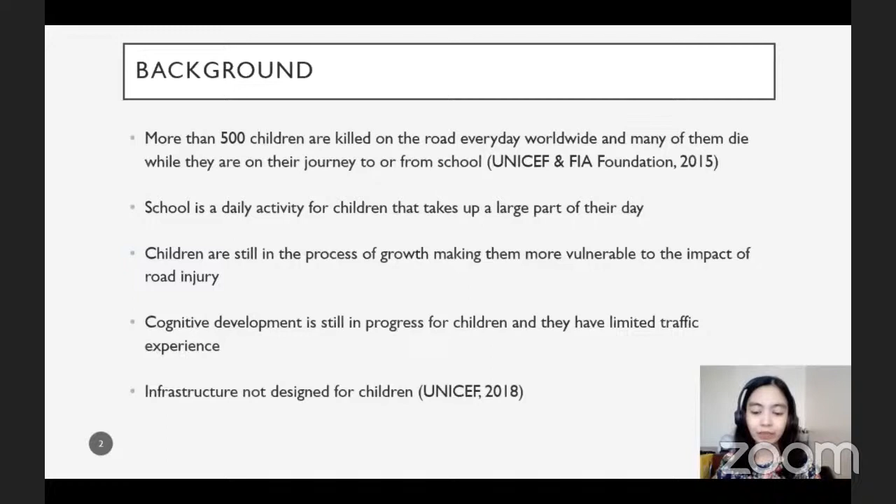So how do we create safe journeys for children between home and school? One helpful first step is by determining the commuting characteristics of school children to and from school. The results of the study can be a basis for policymakers in order to improve the safety of journeys made by students between home and school.

The study is limited only to elementary and high school students in the Philippines. Also, as this research is part of an ongoing project on child road traffic injury prevention of UNICEF Philippines, the areas that they have selected will also be the study areas of this research, which are Valenzuela City and Zamboanga City in the Philippines.

As for related literature on travel characteristics, three studies conducted surveys in urban areas, with samples consisting of elementary and high school students and their adult companions. The common mode of transportation is walking, and the majority of students live within 5 kilometers from school.

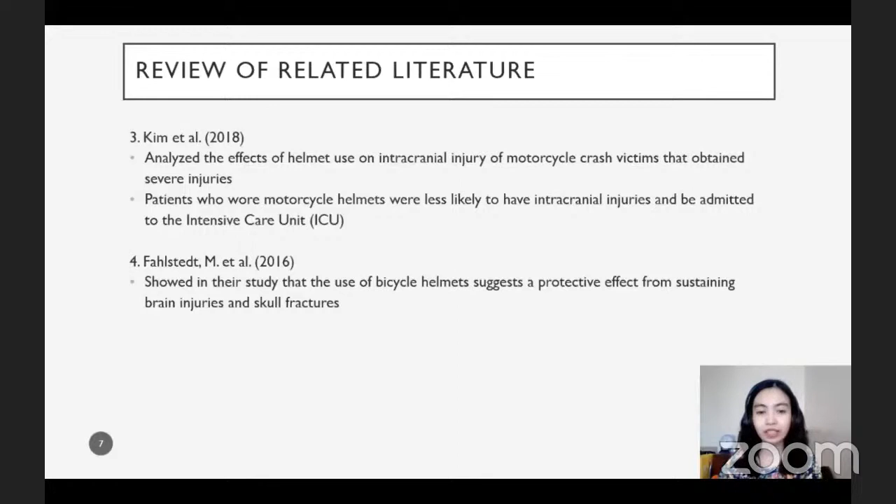For literature on safety vehicle devices, Nurbin et al. said that for less risk of injury during vehicle crashes, it is best to implement both appropriate restraint use and rear row seating for children of all ages. Meanwhile, Bastos et al. discovered in their study that there was a significant decrease in the non-use of motorcycle helmets due to higher penalties. Kim et al. said that patients who wore motorcycle helmets were less likely to have intracranial injuries and be admitted to the intensive care unit, and Fahlstedt et al. suggested using bicycle helmets to protect the user from sustaining brain injuries and skull fractures.

These are our study areas: Valenzuela City, located in the National Capital Region, a highly urbanized city with a land area of 44.59 square kilometers, and Zamboanga City, a highly urbanized city in Region 9 with a land area of 1,414.70 square kilometers but located in a more provincial setting.

The pilot survey was implemented from November 8 to 18, 2019 in Valenzuela City, while it was implemented from November 11, 2019 to January 7, 2020 in Zamboanga City. 25 schools participated in Valenzuela City, while only 24 participated in Zamboanga City. 30 students were randomly selected per school to answer the survey questionnaires.

There were two sets of questionnaires, the to-school questionnaire and the from-school questionnaire. Some students weren't able to return the from-school questionnaires, that is why there is an unequal number of to-school and from-school responses. For data collection mechanics, survey questionnaires were given to teachers of the schools, and they randomly selected students from each grade level. These were given as an assignment to students to be submitted the next day. The following data were collected using the survey questionnaires.

For the survey results, in Valenzuela City and Zamboanga City, the majority of respondents are students and female. The usual ages who answered in Valenzuela City and Zamboanga City are 7 to 11 years old. Older respondents corresponded to children's parents or guardians. In Valenzuela City, students were enrolled in grades 1 to 6, while in Zamboanga City, students were from grades 1 to 12.

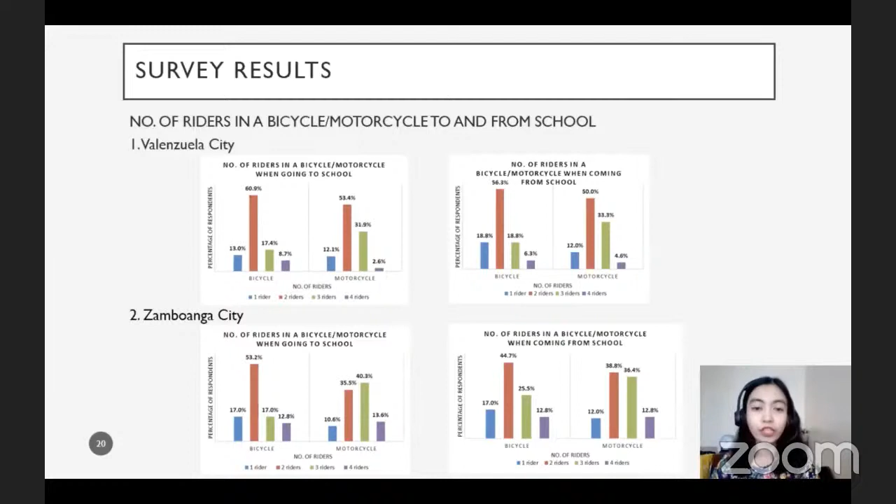Although majority of motorcyclists use helmets, there's still a substantial number who do not. Reinforcing helmet use should be done since it was found that the type of vehicle mostly used by children for their commutes is the motorcycle, and there are usually 2 or more riders on these vehicles.

Majority of students from Valenzuela City who rode the car said they did not sit in front, while almost half of students sat in front of the car in Zamboanga City. Seat belts are still the widely used vehicle safety device in both cities. There were more respondents who used a child seat in Valenzuela City than in Zamboanga City.

In the related literature mentioned earlier, it was recommended that to have the best safety benefits, children must sit at the back and use the appropriate restraint.

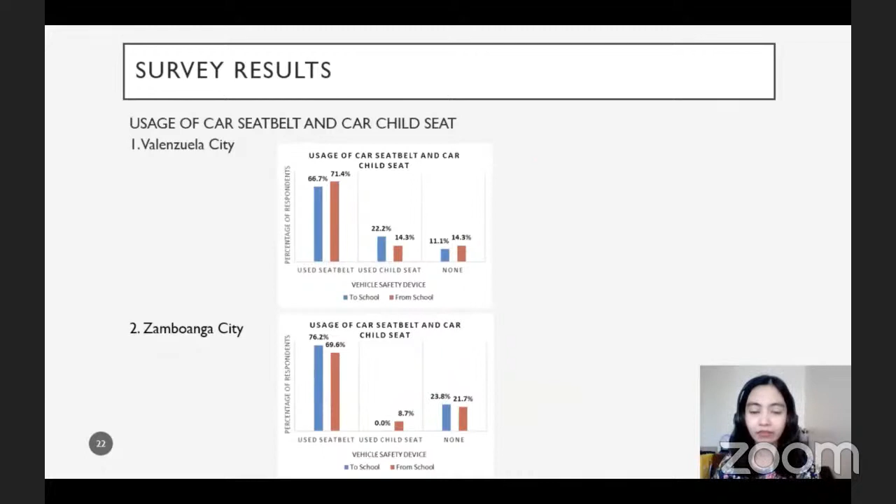For the 3% to 5% that have already encountered an accident in both cities, the usual location where accidents happened occurred near school in Valenzuela City and near home in Zamboanga City while going to school. Accidents usually occurred near home in Valenzuela City, and near school and near home in Zamboanga City while coming from school.

Only about 12% of students in Valenzuela City have almost encountered an accident or been involved in a near-miss incident, compared to 16% to 21% of students in Zamboanga City. The location where these near-miss incidents usually happen were between home and school in both cities.

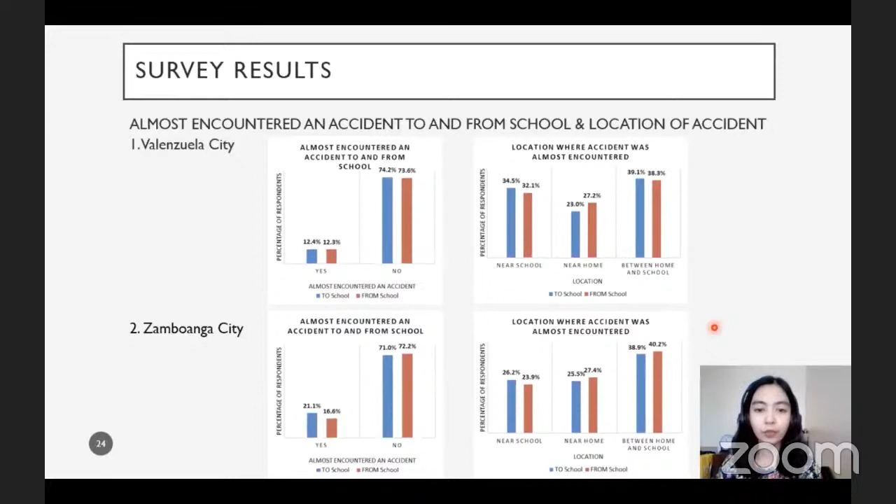The locations where accidents happened and almost happened need to be visited to determine why accidents usually occur there. Although with a limited sample, the survey results describe in detail the commuting characteristics of school children between home and school in Valenzuela City and Zamboanga City. Data can be a starting point in improving the physical environment to provide evidence-based policies and measures to help keep children safe from road traffic injuries.

Since walking is the most dominant mode of transport of school children in Valenzuela City, it is recommended to check on the walkability of the school surroundings. In Zamboanga City, the main mode of transport is the motorcycle, so parents should strictly abide by Republic Act number 10666.

Also, a full-blown commuting characteristics survey is recommended to be done in Valenzuela City and Zamboanga City as a further study for a more detailed analysis of the travel characteristics of school children.

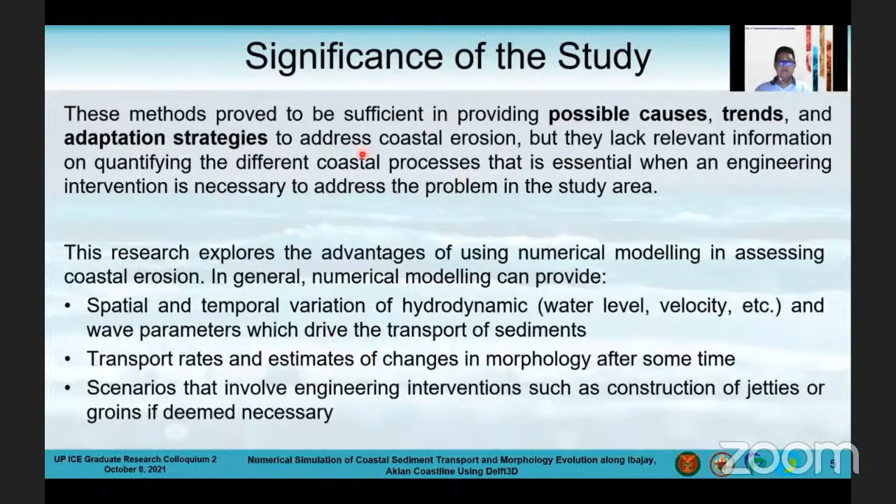My study area is in the municipality of Ibajay, Aklan. This is one of the areas tagged as having experienced coastal erosion due to the presence of uprooted trees along the coastline and some scarps.

It is a third-class municipality with fishing as a primary source of livelihood. There are boats parked along the coast and households present around 10 meters away from the coastline. There's also a mangrove eco park and a small stream that discharges into Sibuyan Sea.

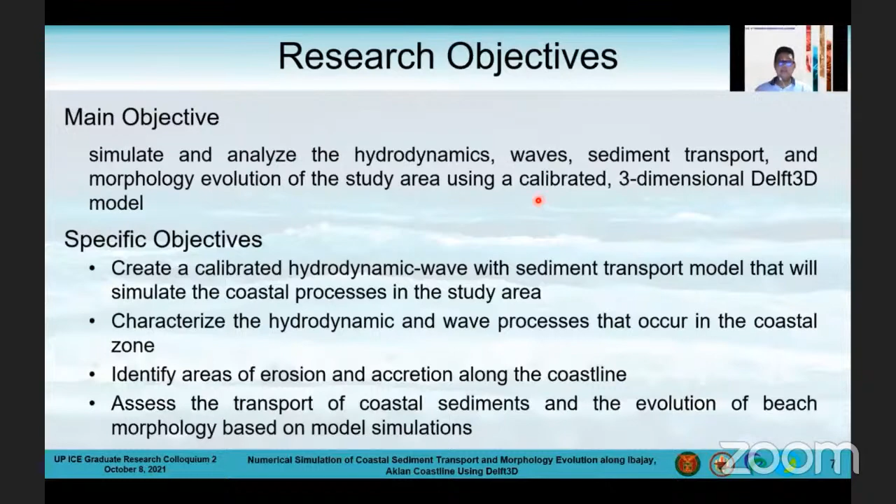The main objective of this research is to create, simulate, and analyze the hydrodynamics, wave, sediment transport, and morphology evolution of the study area using a calibrated three-dimensional Delft 3D model. Along these main objectives are the following specific objectives.

The scope and limitations of this study are the following. First, the modeling platform that I will use is Delft 3D. So the analysis or the governing equations will be limited by the mathematical models and numerical solution of the platform.

Also, the modeled scenarios will be two. The first one is a long-term simulation under prevailing wind and wave conditions, and the other is a short-term simulation under extreme conditions. Specifically, this is Typhoon Frank, which devastated the area last June 2008.

Now, there is a limitation in available data. So the sediment transport was not calibrated, as well as the data during the typhoon event. This limitation is accounted for by ensuring that the main driving forces from hydrodynamics and waves are calibrated. From this, the sediment transport can be assumed as reliable in terms of the simulation results.

And the parameters that were used in calibration for the hydrodynamic and wave models were used during the typhoon event. In addition, the typhoon parameterization was calibrated as well, to account for the lack of data during the typhoon event.

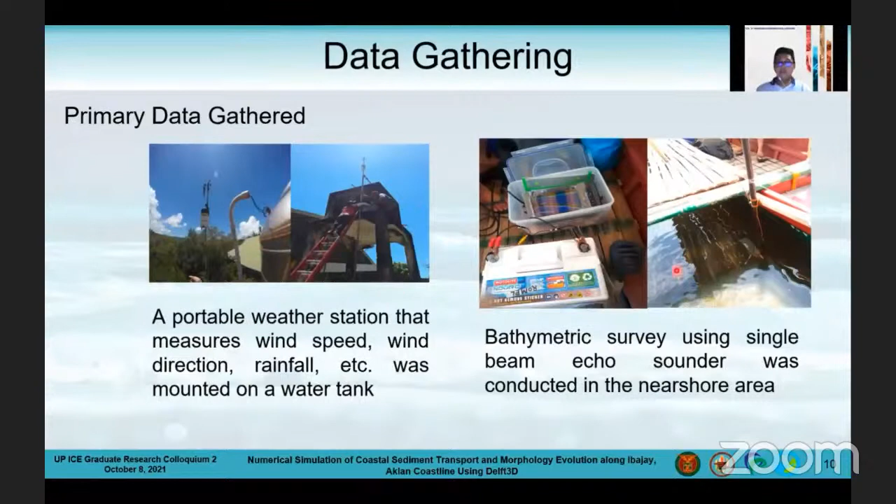Here's the research methodology. There are a lot of data gathered in this research. We gathered meteorological data by installing a portable weather station. We conducted a bathymetric survey using a single beam echo sounder. We also gathered primary data that was used for calibration using a set of sensors deployed at this point in the study area.

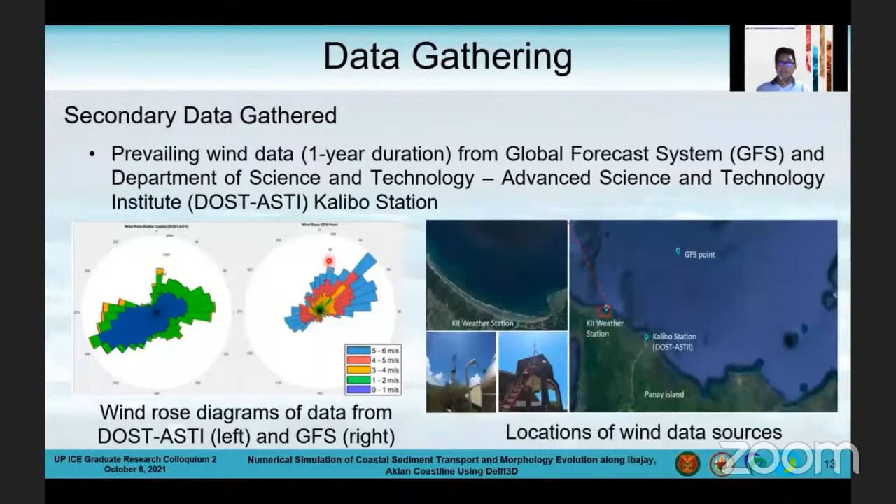We also collected a sand sample and underwent sieve analysis and obtained a mean or median diameter of this value. There are also a lot of secondary data gathered from GEBCO and NAMRIA for bathymetry, from DOST ASTI and the Global Forecast System for prevailing wind data.

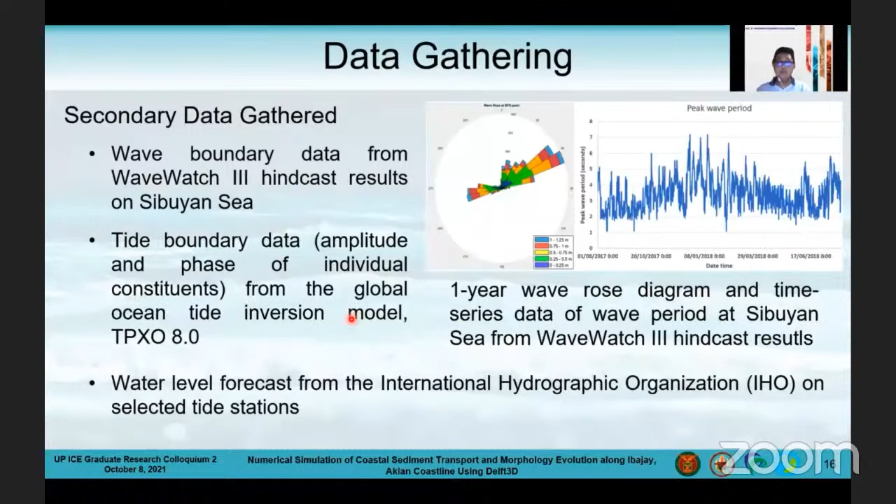Wind data during Typhoon Frank was obtained from PAGASA meteorological stations in San Jose Station and Roxas City. The typhoon track data of Typhoon Frank was obtained from JMA, and wave boundary data from WaveWatch 3 hindcast results on Sibuyan Sea, tide boundary data from the Global Ocean Tide Inversion Model TPXO 8.0, and the water level forecast from IHO on selected tide stations were used for validation of the simulated water level data in the numerical models.

There's also secondary data for the stream discharge, which came from an unpublished SWAT simulation of the stream watershed.

In this research, 3 computational domains of varying extent and resolution were created. The largest is called the regional model. Then there is the local model covering the northern coast of Panay, and the nearshore model, which is exactly on the study area.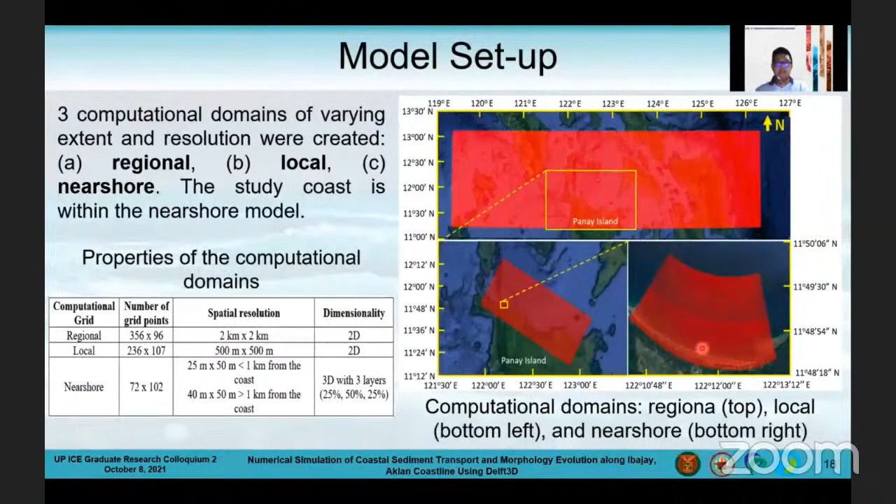So the next few slides show the properties of the different computational domains: this is for the regional model, this is for the local model, and this is for the nearshore model.

Here's a flowchart of the model calibration conducted in this research. In the absence of data for calibration of the sediment transport model, that calibration was not conducted here, stopping at the wave and hydrodynamic model only. So only the default values for the sediment transport model were used in this study.

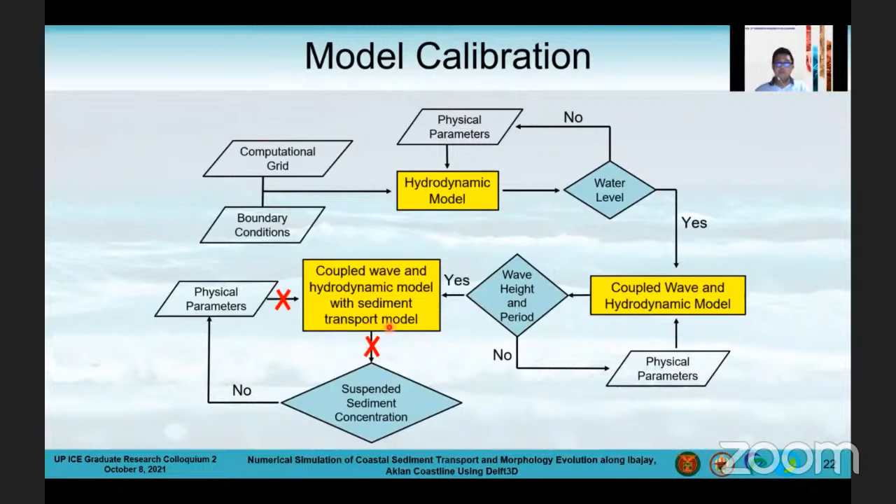In assessing the simulation results, we used literature from Williams and Esteves, which provides guidelines on assessing, calibrating, and validating hydrodynamic, wave, and sediment models, to determine whether the model is good enough to simulate the actual conditions in the study area. The next few slides show the result of the calibration of the 3 computational domains.

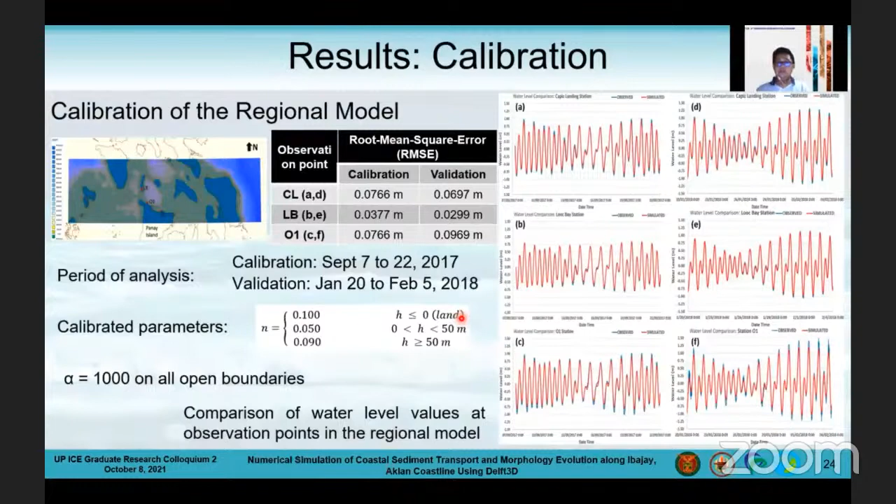This is for the regional model, calibrated with respect to water level values. The Typhoon Frank parametrization is an important parameter. When you have a typhoon and want to include its effects in a numerical model, in Delft3D it was included as a spider web, which provides the spatial and temporal variation of the wind profile.

This parametrization is done in Delft Dashboard, and to assess whether this spider web actually captures the variation of wind and pressure in the model, it was compared with the measured wind speed and direction at the 2 PAGASA meteorological stations.

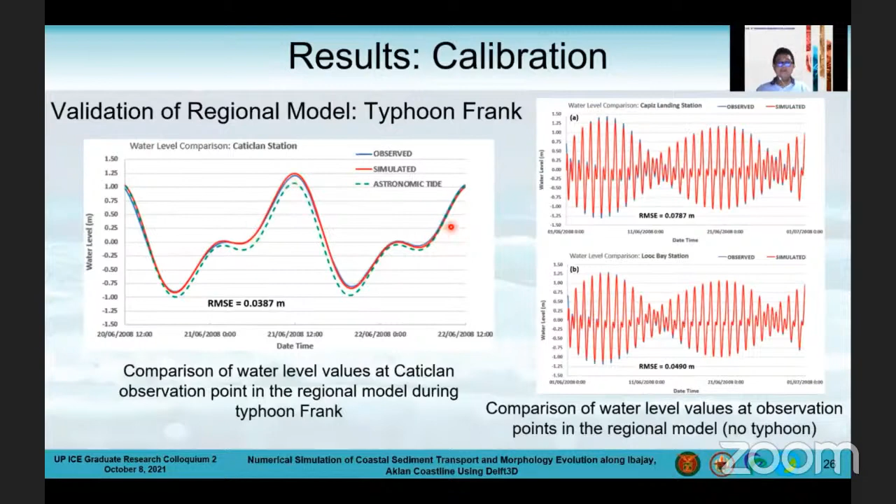Another validation during Typhoon Frank is the response of the water level at Caticlan Station. As you can see, the simulated water level during the peak of Typhoon Frank was captured using the calibrated parameters of the regional model.

For the results, the hydrodynamics in the nearshore model under prevailing conditions show 2 patterns. During ebb tide, water moves from the lateral boundary at high speeds towards the center at 0.5 to 1 meter per second. During flood tide, the flow reverses but at lower speeds. This will have a significant effect on sediment transport, which will be discussed in the succeeding slides.

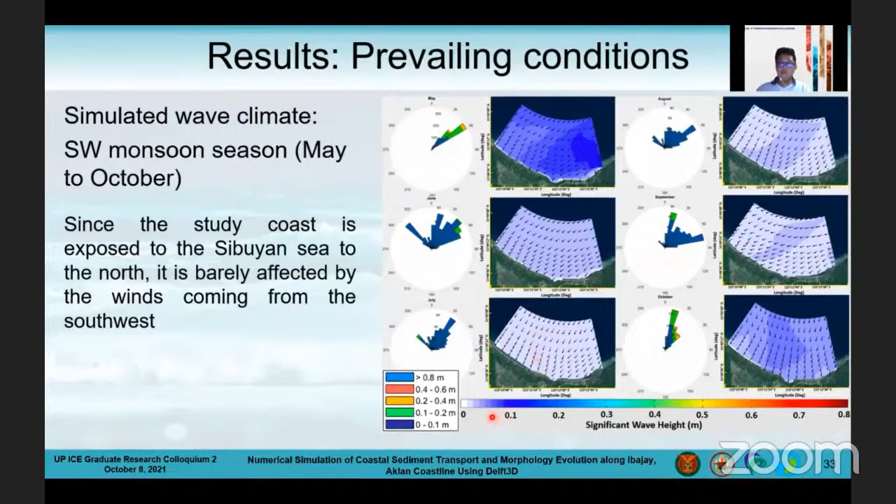For the waves, since the study area faces the Sibuyan Sea to the north, southwest monsoon winds do not affect wave growth. In fact, waves during this season only reach up to 0.1 meter. On the other hand, during the northeast monsoon season, the winds intensify the approaching waves to the coast, reaching up to 1 meter in height.

For the nearshore area where wave breaking occurs, the turbulence creates an uplift force causing the sediments to be lifted. Now, if the period of the waves is short enough, once the sediments are uplifted, the incoming waves will push those uplifted sediments onshore, causing them to deposit toward the coast, as we can see in this simulation result.

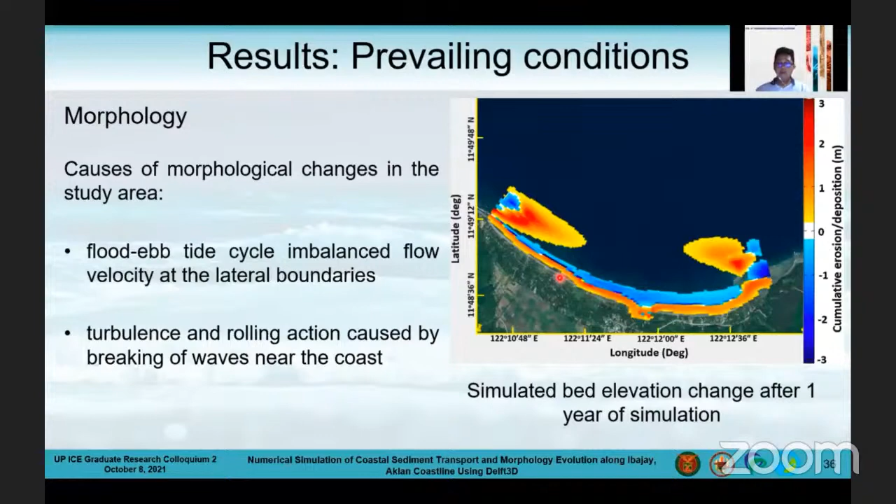Now, during the southwest monsoon season, where the processes are calmer, it promotes recovery of the moved or transported sediments, and they come back to their original position.

Beach profiles can also be plotted in the numerical model, as you can see here. The beach profiles reflect the changes in morphology due to wave action nearshore and due to tidal asymmetry somewhere offshore. Recovery during the wet season can also be observed in the beach profile if you compare the after-dry-season and one-year simulation.

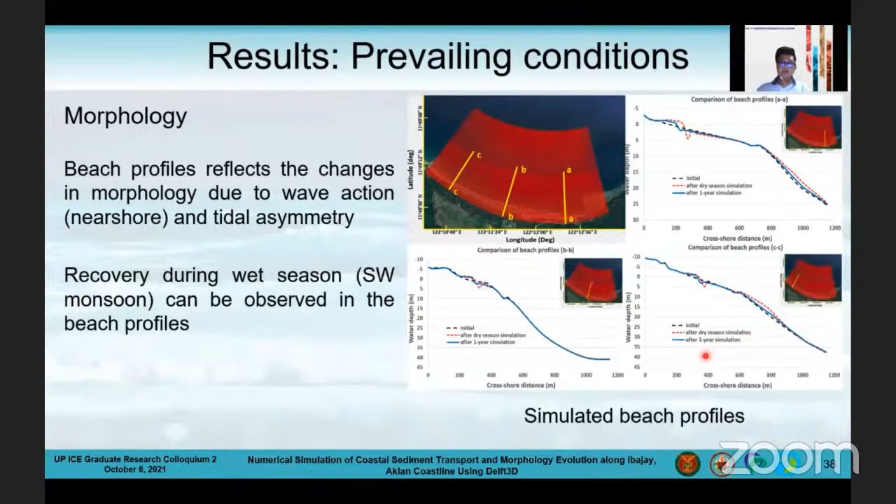Now, in terms of the typhoon conditions, the selection of Typhoon Frank was done based on the historical shot of this study area. This shot in the study area showed significant erosion, taken August 2008, and we investigated the tracks of the typhoons passing through the study area.

At this time, only Typhoon Fengshen had the most significant relative effect on the study area.

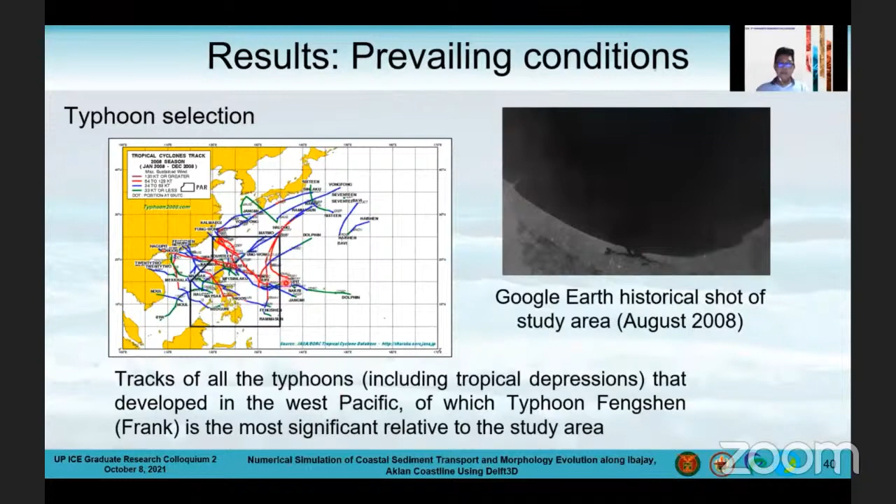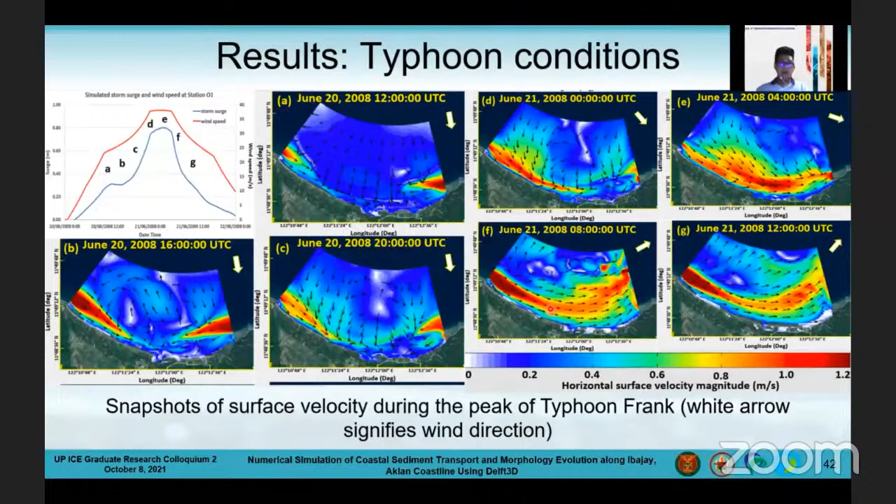You can see that there's a longshore current, which is significant in the movement of the sediments. In terms of comparison between the bottom and surface velocity, we can see that the bottom velocity does not follow the direction of the surface, because the surface velocity is greatly affected by the surface winds caused by the typhoon.

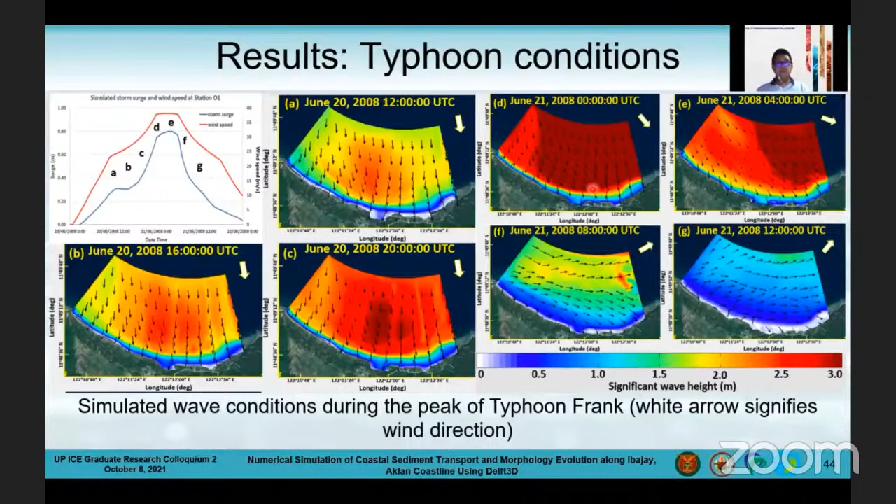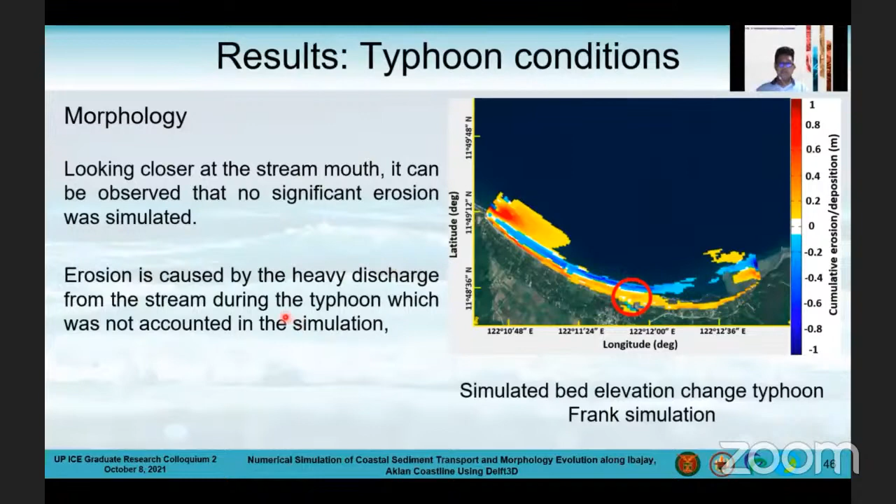The eroded sediments in this area were transported onshore because of the breaking of waves. Looking closer at the stream mouth, we can see that there is no significant erosion simulated. This indicates that the erosion in the previous Google Earth shot from August 2008 was caused by the heavy discharge from the stream during the typhoon, which was not accounted for in the simulation.

In summary and conclusion, a calibrated hydrodynamic model with sediment transport was successfully created that can predict the hydrodynamic and wave conditions in the study area. Under prevailing conditions, sediment transport patterns were observed caused by tidal asymmetry and wave breaking, and areas of erosion and deposition were identified based on simulation results.

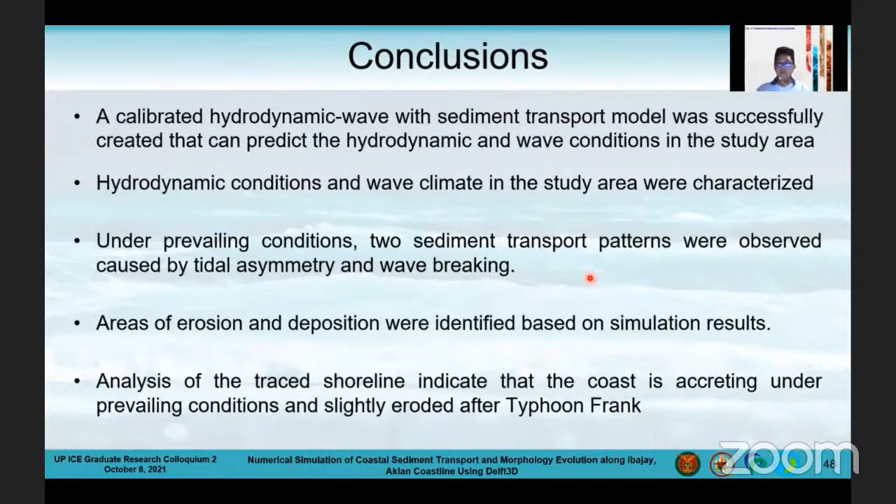Finally, analysis of the traced shoreline indicates that the coast is accreting under prevailing conditions and slightly eroded after Typhoon Frank. Finally, we can say that numerical simulation provides a more holistic approach in assessment of coastal erosion, as indicated in the results of this research.

For future improvement of this work, calibration of the sediment transport model will improve the accuracy of the simulation results. We can use additional data if available, and more accurate hydrologic modeling of the stream will complete the features of the study coast. So that's it, and thank you very much for your attention.